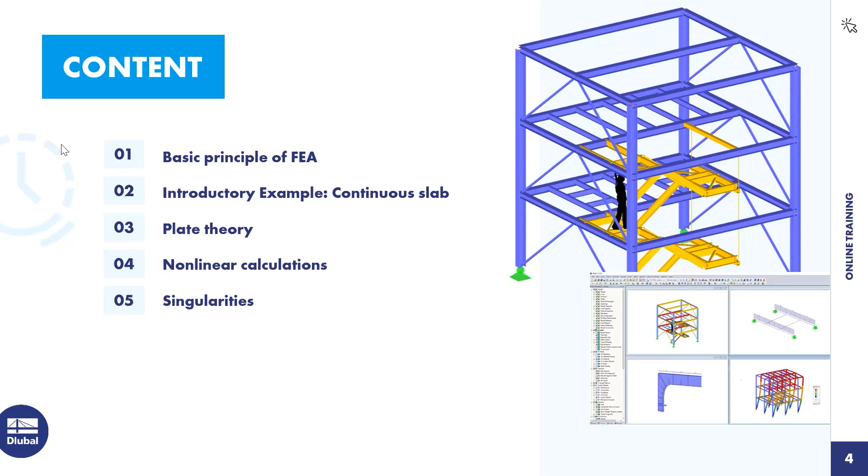Okay, so let's start with our basics of the finite element analysis. As you may know from previous static lessons in your studies, there are two methods to calculate overdetermined systems: one would be the displacement method, and the other would be the force method. The force method is called that since the forces are the unknowns in this solving process. Within the displacement method, we have the displacements as the unknowns. The displacement method is, in this case, more important for us since it is implemented within RFEM. So also most computer programs will use the displacement method.

In general, the finite element analysis is used when an analytical solution of the structure is hardly possible. That means we can't just create a function for, let's say, an 8-story building which gives us the exact solution for every force we have there. Instead, we will take the help of the finite elements.

And that's what we do with the finite element analysis. We're gonna take the real structure and we're gonna cut it down, or decompose it, into a mesh of finite interconnected elements. So there's just a specified amount of elements in the system, and they are connected to each other. We will see it in the next slide as well—there are some graphics for better understanding. Then what we also will need is to define the properties of the element continuum.

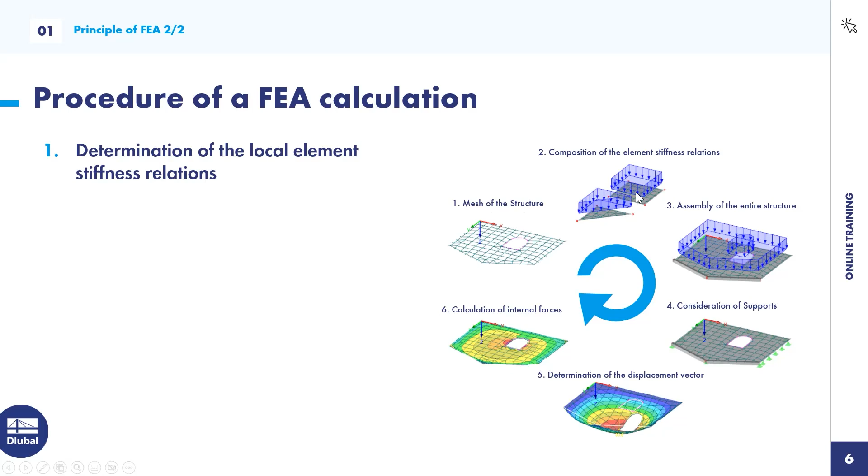For these finite elements we can define the stiffness matrix, the element stiffness matrix, as well as the element load vector. So if we only inspect one finite element, the system is already known. In the next step, we will combine all of those elements, and therefore combine the element stiffness matrices and the element load vectors into the global stiffness matrix as well as the global load vector.

Now for the understanding, there's this static equation called K times U is F, which means the stiffness matrix times the deformation vector is the force vector. Due to assembling them into the global matrix and vector, we have this K as well as this F. But what's not known is the U, the displacement vector - that's what we want to get to.

So let's go. Now we have the total stiffness matrix K. In the next step we will use our support conditions, which we can see there, and use it within the displacement vector. For example, for this edge of the slab we have a line support, and this line support is fixed in the Z direction, which means the line can't move in Z direction.

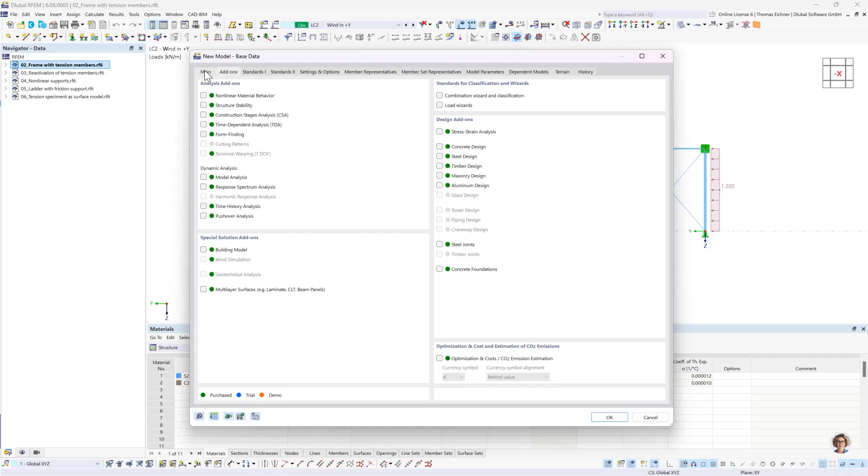Okay, and that's it, so we can press OK and find our empty model in the next step. There it is. So let's go with the view into the Z direction. We can go with our view cube or with those buttons here on top. That's pretty great, and there we are.

So since we're gonna model together, or let's say to start from scratch, I will also delete all of my previous elements here. That means you just delete all basic objects, so there's no material defined anymore, no section, and no thickness.

Now let's go with creating our first surface. Therefore, we could go here and just double click like the surfaces, or right click and create new surface. What's also possible, and I mainly use this button since it's just the fast bar here on top, I will click on this button and then we can choose the rectangle. And if we used it the last time we created a surface, we will just click it and have the dialog opened.

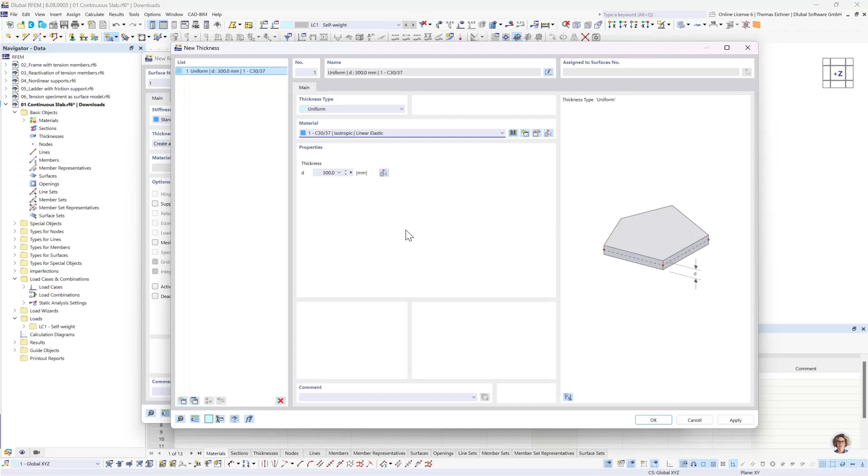So we're gonna take this one, press OK, and there it is. With another press on OK, we will have our material assigned, and then with another press on OK, we will have our thickness as well as our material assigned to this surface creation. And that's what we're gonna do next. We're gonna press OK to get back to our graphic interface.

There we are. And then we will create a 10 times 5 meter surface. Yeah, why not like this? And there it is. So we have our slab right here.

We can also look at it in 3D. We can use our display model settings for showing them, let's say, transparent or filled. This view is always good for bigger structures when there are more surfaces under each other or they're overlapping kind of and stuff, so we can pick them better with this dotted or lined line here. Per double click on it, we can adjust it, but that's not needed right now. Also, we can see our base elements, so our material, our thickness, as well as our surface right here in the data navigator.

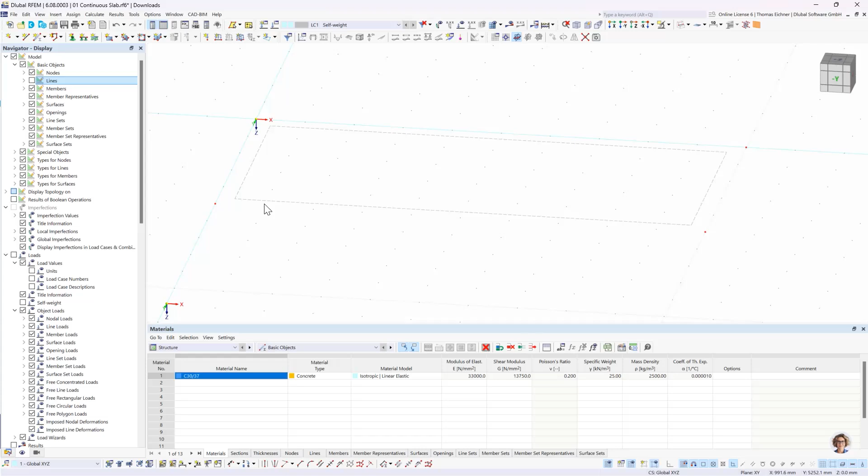Okay, let's go for one additional display option here. You can define different renderings or different views in our display navigator. We could say, okay, don't show us any lines. If we deactivate these lines, these corner lines will disappear. With this, you have your own possibilities on what you want to see and what not.

In addition, there's also this button here where we can influence our rendering. If we go on our rendering on this model, we see the solid model options, and further in the surfaces, we could also show them with thickness. That's if you want to have more like an architectural view, and you could activate this.

However, since it's a static program and we will use it for statics, this kind of 3D element—because like a real plate has a height as well—in our finite element analysis, we will treat this as a 2D element. So it will have just 2 dimensions.

Okay, let's leave this here, that's not needed anymore. So what we did now is we just created one plate. And this plate would just fall down right now.

So what we need next would be our boundary conditions. For those boundary conditions, we will also need a line in the middle of the surface. So that's what we're going to do. We're going to take this create line function, and go in the middle on the top as well as in the middle of the bottom. And there it is, our lines are set.

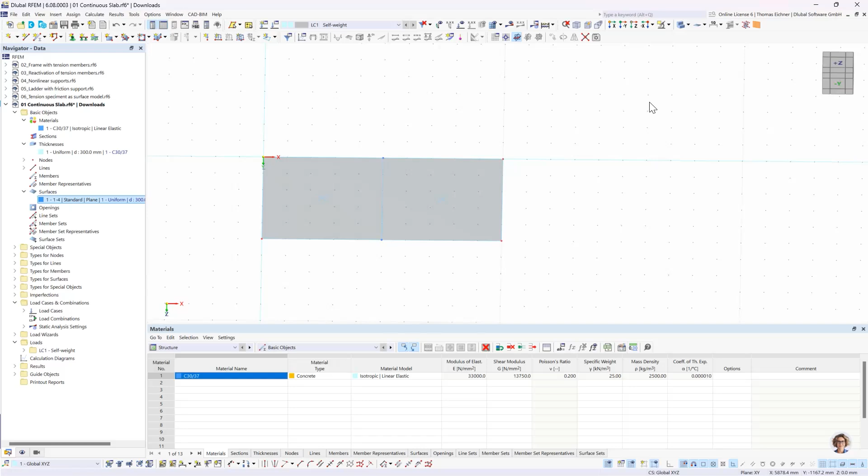We can also show it in our other display mode so we can see the line better.

And now we want to apply our support conditions to those lines. That's completely simple. We're just going to take our quick button here on top, or we could also go for our types of lines for line support and then assign them. However, since this is the most used tool here on top and it's quite fast, we're going to go for this procedure. Let's take it and look at this suggested hinged line hinge.

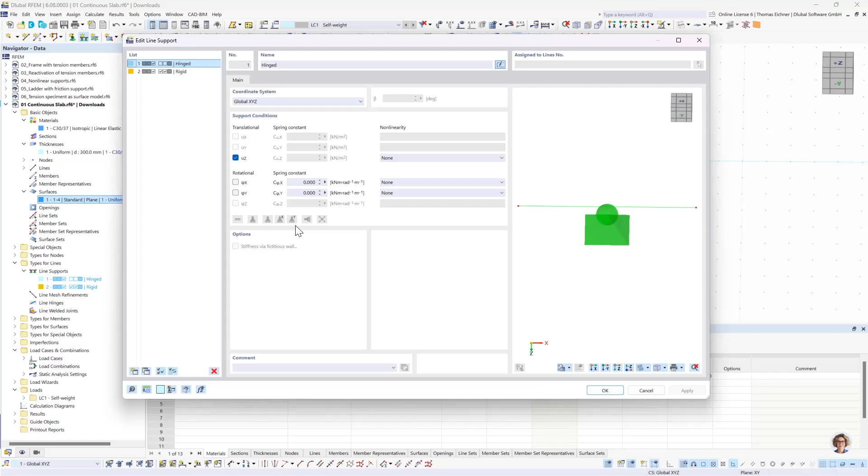Now we will see the benefit of our early decision to model it in the plate dimension and not in the 3D domain. The program now helps us since we are in 2D plate: we don't need the deformations in the horizontal directions anymore, and we don't need the rotation about the z-axis, which also would be kind of deformation in horizontal direction. So with this, we only really want to hold like the z direction on these lines, and that's already set within this preset hinge. Let's go for it.

Here again, and then we will apply those supports to our lines. There they are. We can also apply the loading next, which will be just a uniform load, uniform surface load of 10 kilonewton per square meter. With that done, we can just assign it to our surface here. Okay, and there it is.

So our loading is done, our supports are done, our system is already ready for calculation. Just another hint: we can also adjust the size of supports as well as of the loading if we want to have it changed.

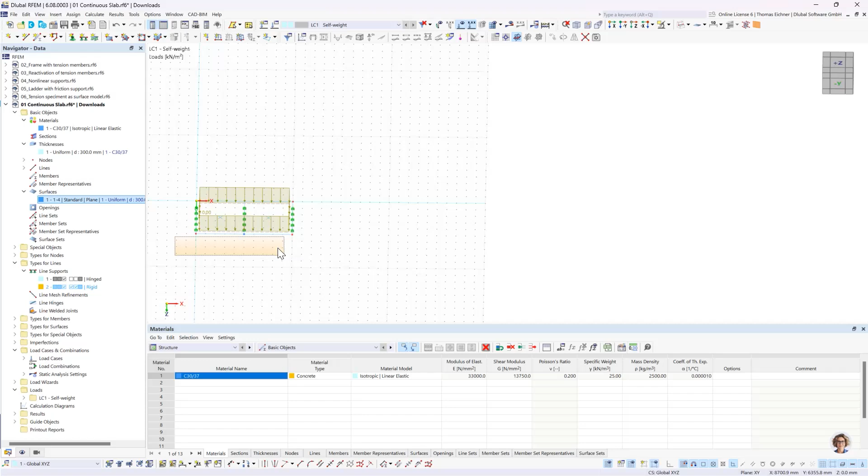Then maybe let's just create our further plates for the investigation. Maybe you saw it already on the PowerPoint file—we will need 4 plates to investigate, which means we will go again and select everything within our current system. We will then right-click it and take the benefit of our move and copy function.

Let's click here and let's also check this create copy button, which is really important. The next step, we're going to copy it 3 times. We have a length of 10 meters, then I want to have a space of 5 meters, and then there should be the next system.

So we will need 15 meters. Now I just see from a previous model I had open, I'm still stuck with millimeters here as the dimension. I want to work with meters in the current model, so we can go for this units button on the bottom. We click on it, and this red arrow will help us see what units are used in the current dialog. We see we have lengths in millimeters, and we're going to just change it to meters.

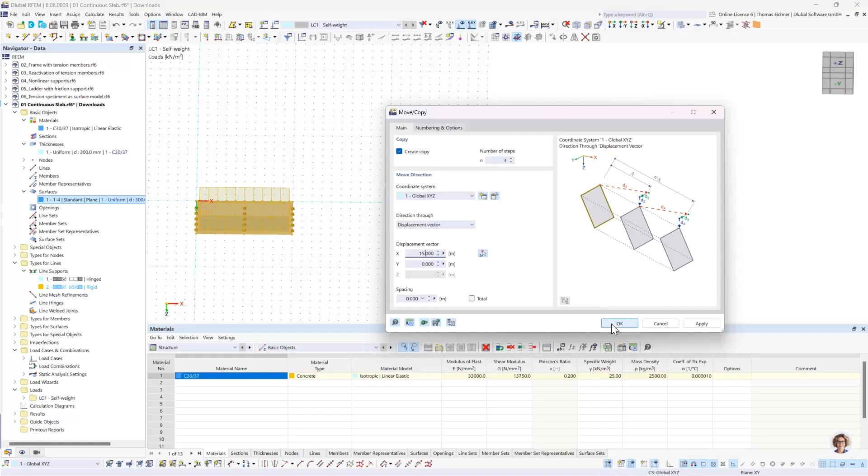Let's prove it here and set our displacement for the X direction to 15 meters. When it's done, we can confirm it, and there are our new models.

Now we see that our grid is not over the whole system anymore, so we want to adjust our grid here. That can be done with a right click anywhere on the screen, then clicking on the work plane and grid options.

Within here, we can see we currently have 30 dots from here, and that's not enough. What we want is a lot more points, so let's pick 200. Later on I'll show you how to set the number of grid points dynamically.

We also want a different spacing between those dots. Currently they're set to 1 meter, but the problem is we won't have dots in the middle of the plate. Since it is 5 meters, the middle would be at 2.5 meters. So I will adjust it and make our grid a bit more fine. Let's set it to 0.5 meter and apply it.

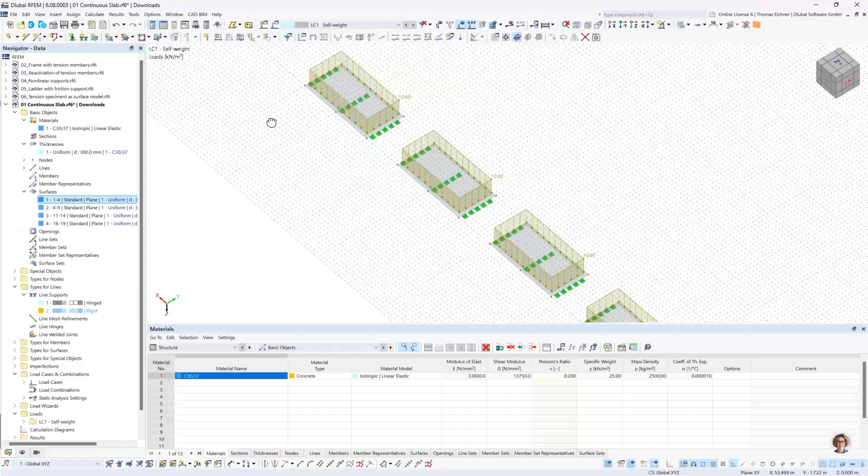We can also look at our plates in 3D for a second. Let's go like this - looks okay for this short duration of time. We just created 4 cool systems.

At least simple systems. Okay, so in the next step, we will go for the Z view again, and as I previously mentioned, we want to investigate the size of those finite elements. Another hint: if you double click your middle mouse button from anywhere here, you'll get back to the system, and the screen adjusts to fit all of your system within the window.

Since we want to investigate the size of the finite element mesh, we'll also want those slabs to have different finite elements. But first, what is used if we don't define it for each surface? Without any assignment, we will have just our base settings here.

This means we can look at them with the calculate button on top, and here we can find our mesh options and everything regarding the mesh. If we go for mesh settings right now, we'll see that currently we have a length of the finite elements of 0.5 meters, which means for these edges of the finite elements, the program tries to reach 0.5 meters with them. If it's not possible, it will vary it and could also add triangular elements.

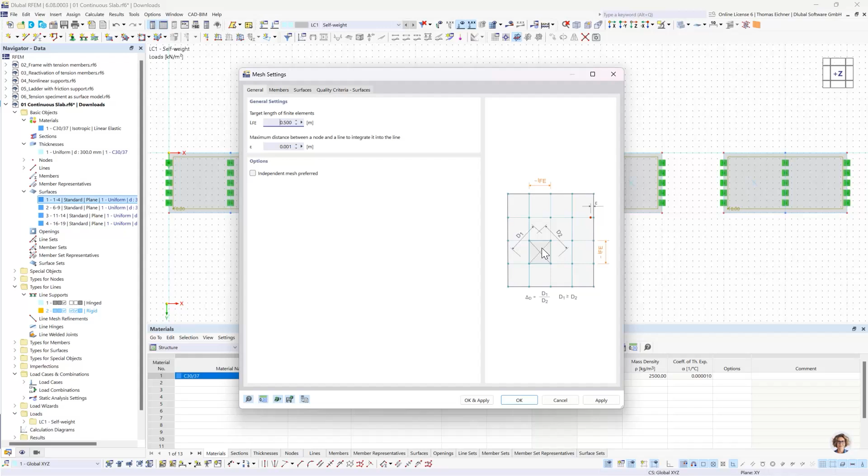However, we won't use these global settings at all, since we're going to apply surface refinement adjustments for every surface here. And since we're talking about surfaces, here's another hint: whenever you're modeling something, and this something can be assigned to a basic object, then it is kind of a property of this basic object.

That's where our types come into play. Right here we have our types for nodes, for example nodal supports. We have our types for surfaces, like surface supports. And here in types for surfaces, we can also find our surface mesh refinements, which we'll open with a simple double click.

Right here, we can now just create our surface refinements. The first one will be quite coarse - we'll go for 2 meters and assign it to our first surface here. We'll apply it and create our next mesh refinement.

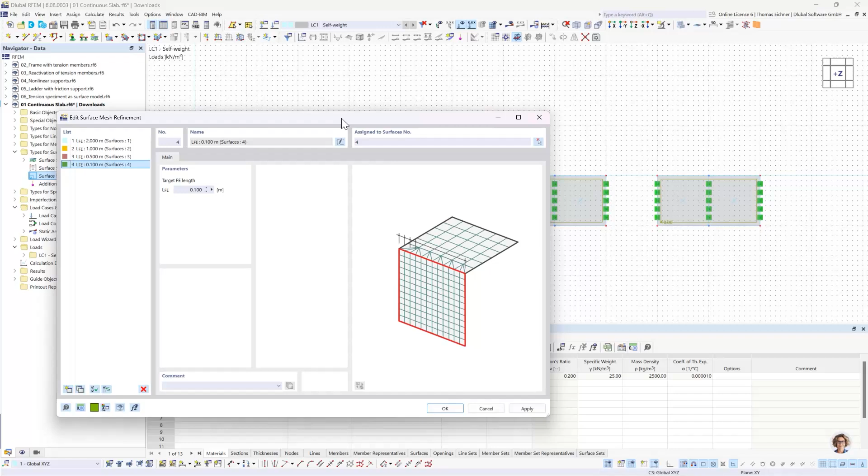If you press cancel, everything we did within this dialog is not saved, so we will press OK. And before I press OK, I just want to have this here so you'll see what happens. Let's press OK, and there it is.

We now have a new rectangle within our surface, and we can see this for every surface. This shows us what the desired size of these finite elements will be. Here our quite coarse one is 2 meters in length, and here we'd have to zoom in to even see how big this element is, so that's really fine.

Okay, so now we have the system created. Now we can go on and create a little helper for our interpretation of the results. Since surface results are not the best to interpret within the surface overall, we could also create a section through all of those continuous slabs, and then we can evaluate the results just within this section. That's what we're going to do.

Now, the section is not a property of any basic object. It's not only that the section can cut a solid, it could also cut a surface, so it's not a property of a surface, for example. For that case, we have something called special objects.

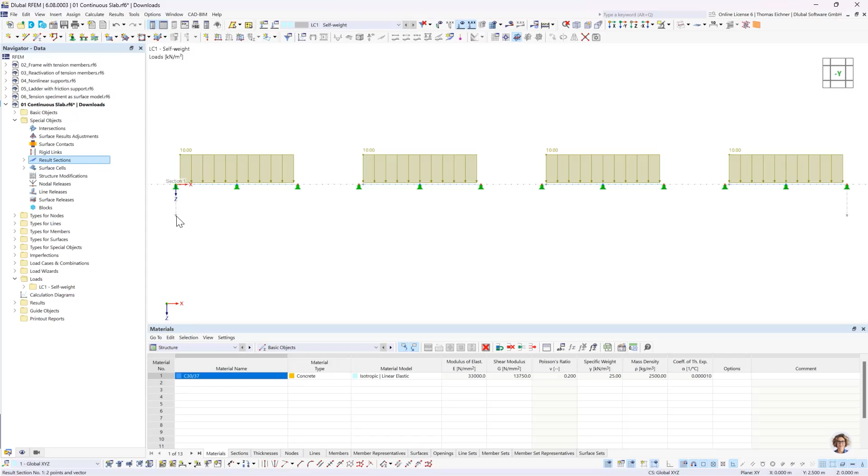Let's press OK, and let's turn the model for a second, and here we see it. Oh, maybe it's better to just use this -Y view, and there we see the section right here. Okay.

So our surfaces are ready to go. Let's maybe show our FE mesh of those surfaces again. And for the comparison, we said we also want to look into the results of a just simply supported beam. That's what we're going to do next.

We're going to create here this new member, and within this member, we will have to apply a section since we don't have any. It's like the same procedure as with the thickness before. Let's go for it. Gladly, our right material is already selected here.

And we will have to adjust just the section dimensions. So what do we take here? For the height, it's quite obvious - we will take the same height as for the slabs. But now let's look at the other dimension of this section.

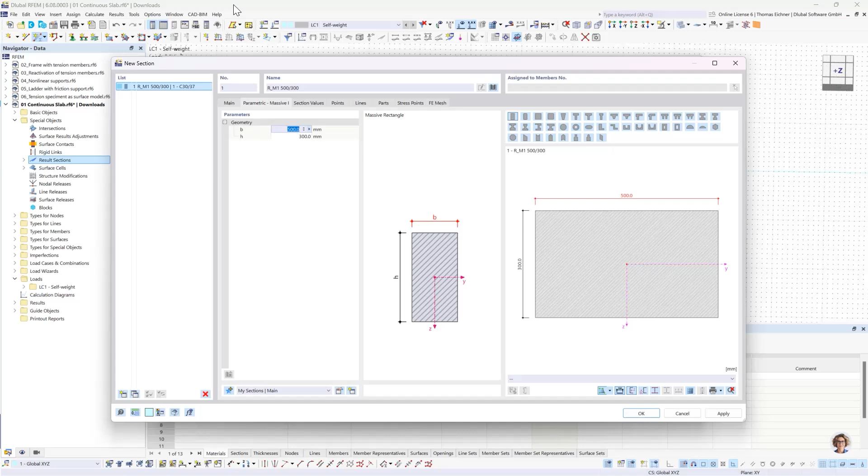We have 5 meters in the width of the plate. However, we now don't need a 5 meter section here. What we do need is a 1 meter, so 1000 millimeter section right here.

And the reason for this is the results of surfaces are displayed per meter, and the results of members and beams are just shown in pure kilonewton - not kilonewton per meter, just kilonewton. So if we would have 2 meters here, it would still be just kilonewton. So to have this per meter within the results of this member, we will just pick a 1 meter section here. Press OK here and also press OK here.

This will get us back to the graphic user interface, and we will be able to create our 10 meter long member. This is done now. Now I see I have here some member representatives.

They wouldn't be needed. Let's see if we can just deactivate them. I mean, it doesn't change anything, it's just some help, but I don't want to have this dot right here.

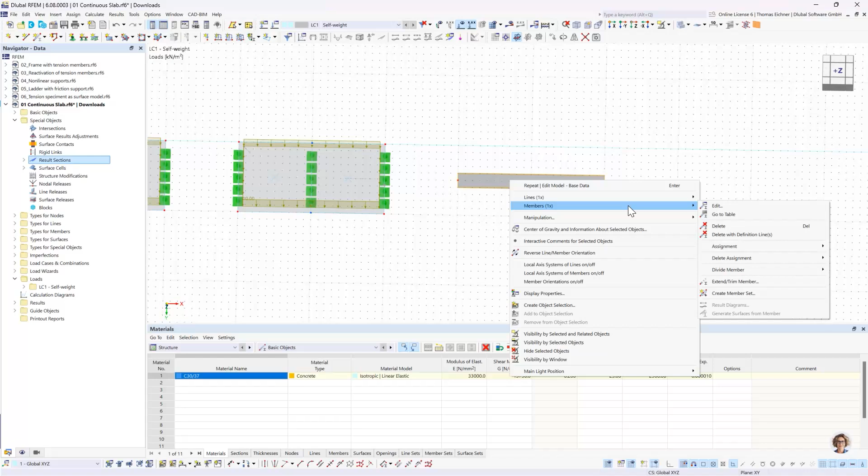Okay, now we want to have supports again, but we are missing this one node in the middle. So what we're going to do is right click on the member, go for this member, and divide it with n intermediate nodes.

There, just one is enough, and we can create the division. If we would now press OK, then this member would be 2 members which are still connected here in the middle, but we can also use our member nodes, so this member won't be divided.

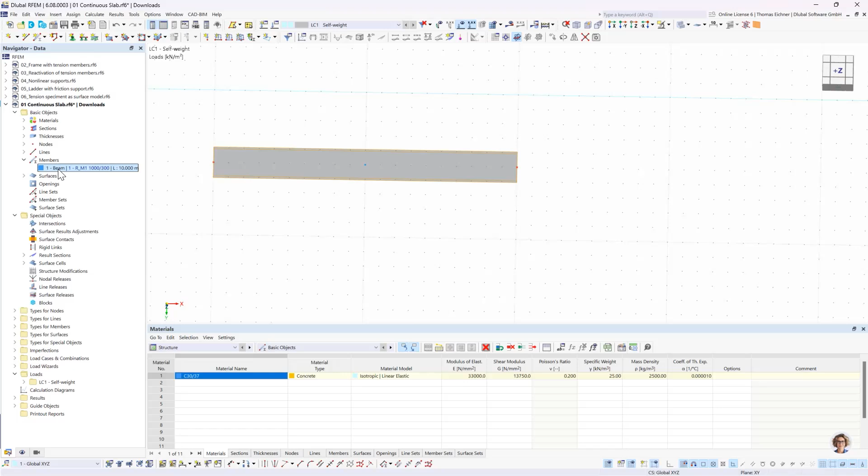Maybe as a hint, it wouldn't make any difference for the results. The only difference now is that we still have 1 member. We still have, if we go for the basic objects, here still only 1 member. And you can have fewer objects within your model with this.

So if we hover over this node, we can see that it's defined with 50% of this member length, which also means if we now change this member in the length, also the place of this middle node will change. So we don't need it.

So let's go back to this 10 meter beam and now apply our support conditions. For this plate, we did only fix the Z direction. Now for the member, if we think about it, if we only fixed the Z direction of this member, that seems okay in the first step. But the problem is it could rotate around its own axis. This is not possible with this line hinge for the surface, since let's say it's supported here and here, so no rotation is possible.

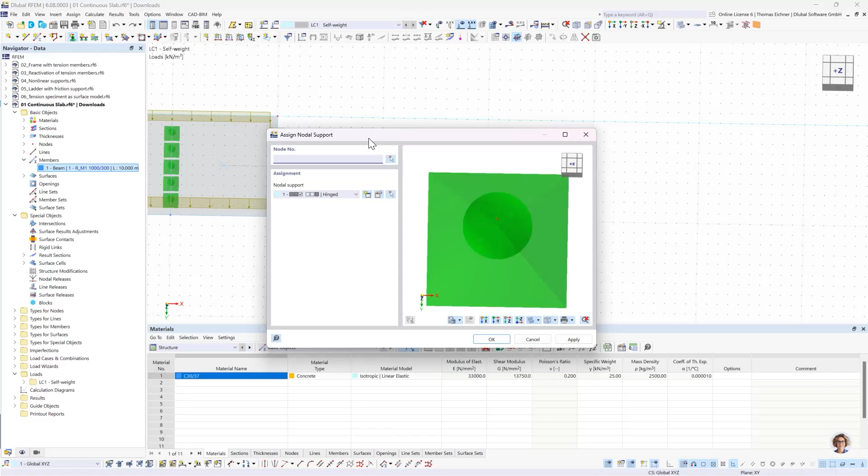But with this point nodal support, we don't have this interaction kind of. So we need to also restrain this rotational degree of freedom. So we will go for this nodal support, and we will look at our predefined hinged one, and there it is. And now there's the point I just said: we will also have to restrain the rotational degree of freedom here.

Now, we would only need to restrain the rotational degree of freedom on one end or on one node, and we wouldn't need it on the other two, but for simplicity I will just apply it to all three nodes, since for the results again it doesn't really matter in this case.

Okay, so there's one more thing, and that's that we need to load the member in the same way as we loaded the surfaces. That means we will take our member load here on top, we will take it and just apply 10 kilonewton per meter to our member. When it's done, we have it right here.

Okay, now our system is completed, but I just remembered I also want to have something different in the material. So now we want to change the material. There are different ways to go to. We could go per double click into our surface and go for the material and so on. That would need a few more clicks.

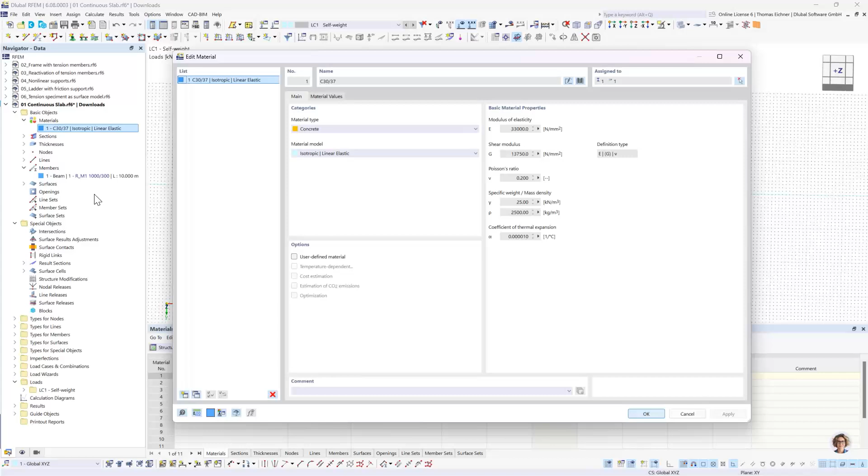The simpler way would go like this. We will take the material here, double click it, and we are in all the properties of the material. And now what I want to change is this Poisson's ratio.

So that's kind of a value that describes the influence that, let's say we have an internal force that makes pressure in this direction. This Poisson's ratio would give you information about how this internal action in this direction would influence the perpendicular direction.

And since we are comparing everything here with each other, we don't really want to have this impact here. So we want to set this to 0. And that's only possible if we first activate this small user-defined material button. With this active, we can just change it to 0, and then we are good to go.

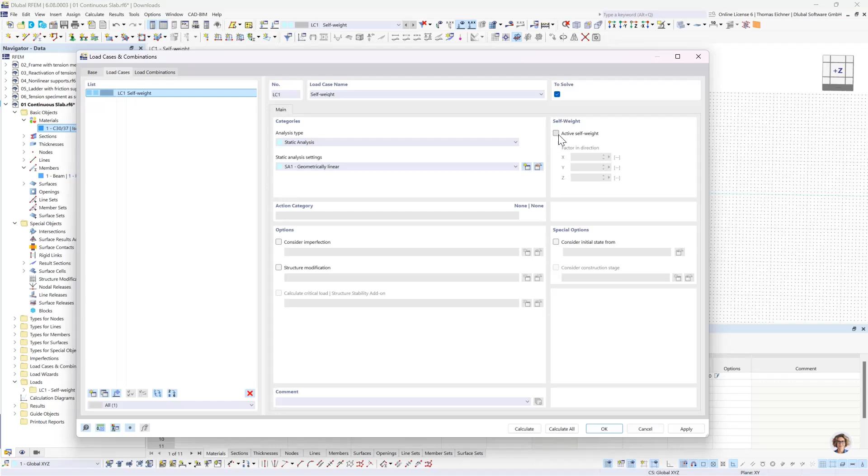Let's see at our self-weight load case here on top. Within this, we only have this one. We have our 10 kilonewton per square meter load in it. But here's also, that's just predefined by the program - it always creates a first load case with only the self-weight active. For this special case, we don't need it. It's simpler to just have a 10 kilonewton per square meter load for interpretation. So we will just deselect this option.

Okay, and yeah, right now we're done. So maybe to repeat a bit of theory from earlier: we have our plate, which defines our stiffness matrix. We have our loading, which defines our load vector. We have our supports, which have influence on our deformation vector. And with that, we have our equation, K times U is equal to F, ready for its solving process.

And that's what we're gonna do now. We're gonna go here and calculate this equation. Let's see what's gonna happen.

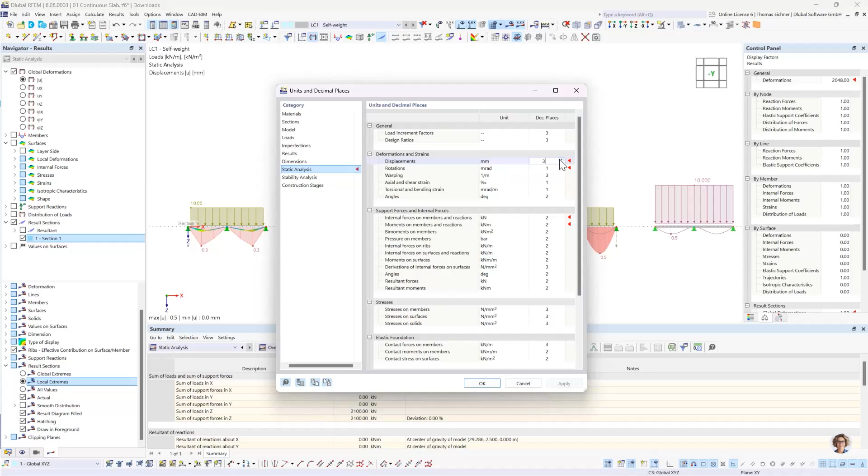Maybe let's make it more clear. One digit is not enough, so we want to adjust the digits here. That's done again with our units and decimal places, right here. Again, our red arrows show us what is currently shown. And here we will go for 3 decimal places.

There we go. And right now, the first thing we will see is the very fine finite element mesh. Well, it's almost the same as our beam element, so that's quite an exact solution.

But now the next thing is, let's look first at the deformations and then at the internal forces. We will look first at the deformations now. We have here that kind of fits. This here, well, the difference is quite low, so I would say that's also precise enough.

Here it gets to something like 10% already. And if I see a 10% difference, in reality that could, maybe that's not enough accuracy for design, but it's also not too bad.

But the problem comes now with this one. And that's quite a bit, that's like more than a fourth in difference. And that's not acceptable. This could lead to a complete collapse of the structure. I mean, this as well, but this is quite fatal.

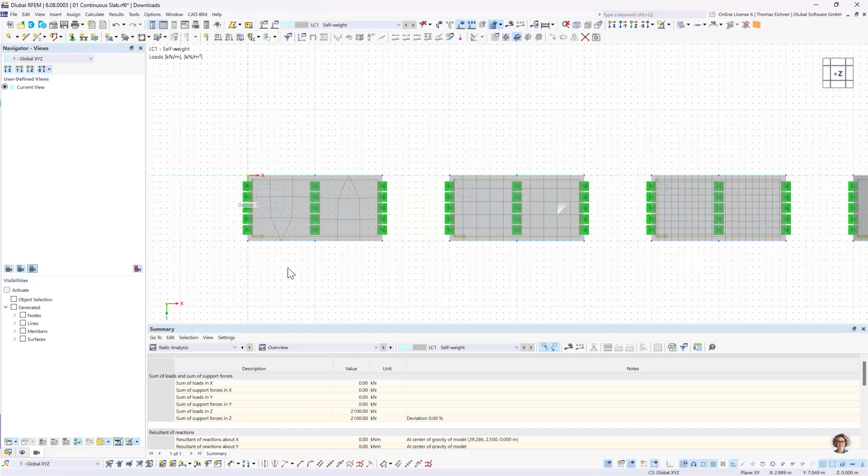So right here we have 3 elements. Now when we look at it, we could also imagine a single span beam here. Then we know our maximum moment would be in the middle. But with this element in the middle, we wouldn't have any result in the middle. That means we wouldn't even have the possibility to show us the maximum here, because the next value which would be shown would be this here at the edge of this element. So that's just not good.

And that's the point here in the next figure. We can see 5 elements here. I learned some rules in my studies, and the rules were like 6 elements between supports for a single span beam should be good. You should use 6 elements between 2 supports, or also if you have a line load or a support load, you should also have 6 elements between this line load and the next support or line load.

Like everything, there's a change in the boundary conditions or the force, there should be around about 6 elements to the next change. For design, if you're just interested in looking at the forces that will get to your supports, then it could also be that just 4 elements are enough. But if you want to remember something for the future, I would go for 6 elements.

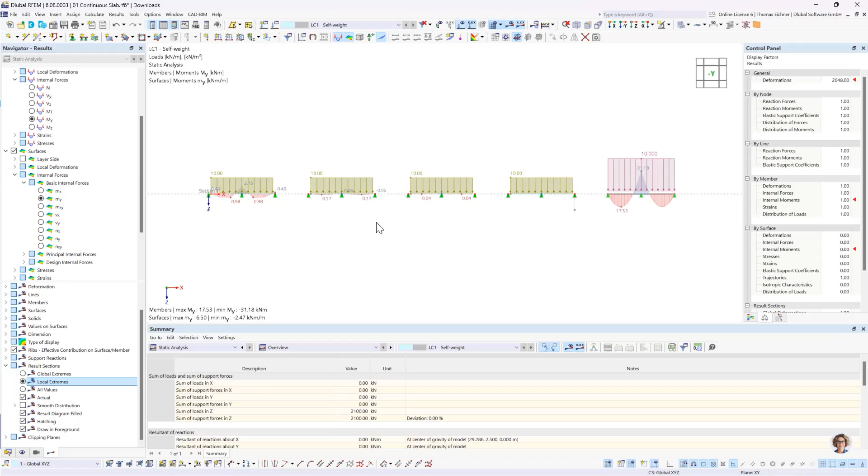Now for the explanation, we have different internal forces conventions here. So for the My, it's quite simple. Our y-axis points outwards. This means with the right hand rule, we will know our positive My would be like this, pointing upwards. It's rotating around the y-axis. That's why it's called MY for beams.

But now it's different for the surfaces. Before I explain it, we will change to the right one. We will go for this MX. Now we see, okay, now we have comparable results. But why is that?

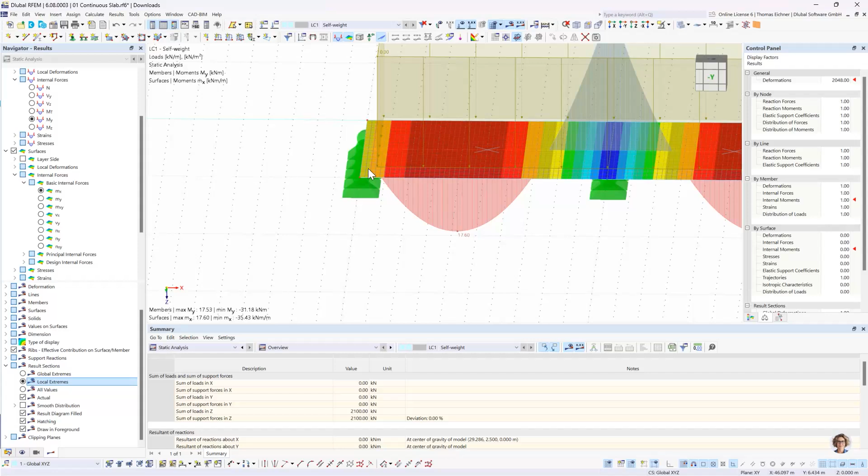Now for surfaces, this is differently defined. So it's called MX since we have the surface, we will go in X direction. And there's a plane that's cutting through the surface now, and it's cutting in X direction, so perpendicular to the X direction. And then we rotate about this edge here, this free cut edge. And that's why, since the cut was done in the X direction, it's called MX. That means the MY would be exactly in the other direction.

Okay, so let's go again for the Y perspective. We can also see here the results are quite similar. And let's not show the forces anymore. 31.18, 31.19, that's almost the same, but there will be some differences.

And this time we will go for this section here. Now we select the section with a right click, and then this result diagrams. We will jump right here. There it is.

And here we can just see the results for the different. It's just the same as we saw in the model, just that they will be next to each other, and they could be better prepared for a printout report, for example.

Okay, don't need this preset. We're only gonna look at our results right here. And there we have it: 31 point something versus 28.45. It's some difference. That's, in this case, I guess 10%.

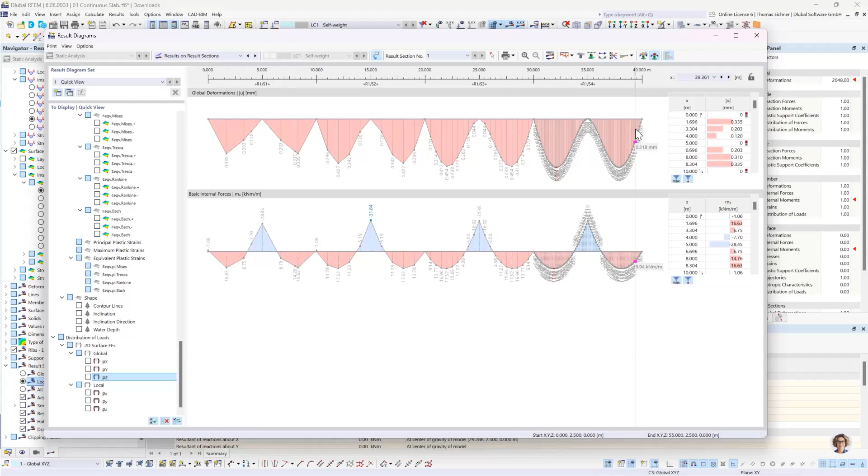And this 10% also holds for the middle of the span here. And this 10%, those are not enough. I would say this result is just not precise enough. So here, maybe we can look at that a bit better. So here this 28.45 versus the 31.18, yeah, almost 10%.

That's not quite good. So that's the problem with this coarse mesh. We will lose exactness in the results. On the other hand, let's look at this extremely fine mesh, and let's also show again all values. Within the left system, we will see we only have 1, 2, 3, 4, 5, 6 elements here. So our global stiffness matrix is constructed out of the element matrices of 6 elements.

We're just ignoring this dimension right now. Let's say we only investigate this direction here. So 6 elements, so this can be, excuse me, this can be quite fast solved. It could also be almost calculated by hand, not fast, but it could be.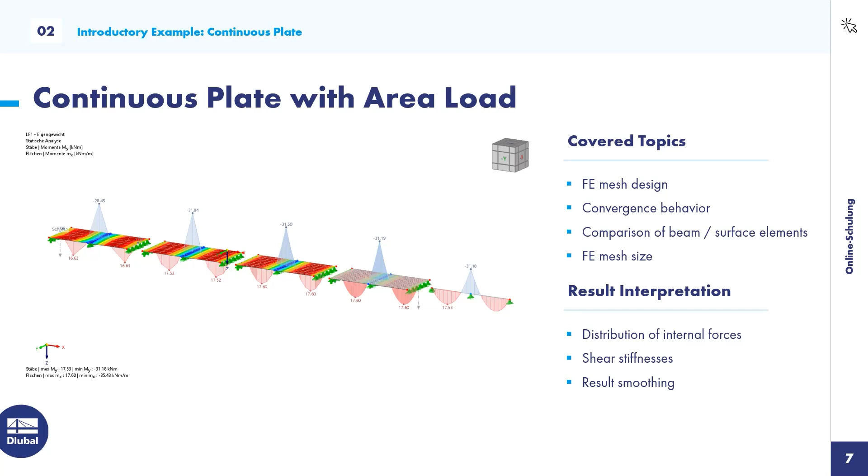Okay, so I would say we're already done with this part right here. And now we can go on for our next short theory. Back for our PowerPoint. There it is.

And the next part will be the plate theory. So for members, you might know there are two concepts or two theories. The plate theories are almost the same as those for members. So for the beam element, we have the Bernoulli as well as the Timoshenko beam. The differences, well, let's go for the similarities first.

The cross sections remain plane, and that's it. Now the differences: the cross sections for the Bernoulli beam remain perpendicular to the member axis, while for the Timoshenko beam, they won't stay perpendicular. You will see it in a few seconds in the next slide what that means.

For the Bernoulli beam, we just don't care about the shear stiffness. We just don't care about the shear deformations, and it's just rigidly for shear forces. So for the Timoshenko beam, on the other hand, we will have an influence of the shear deformations. That means we won't only have this bending deformation, but we will also have an amount of shear deformation that's just added.

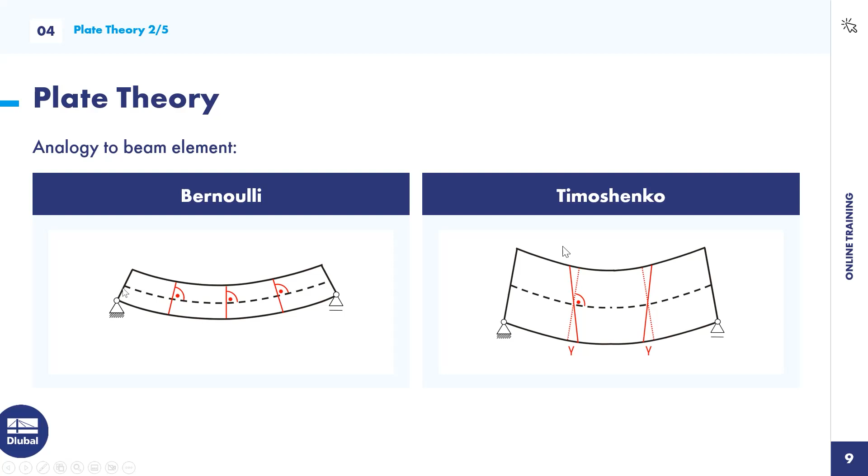Okay, let's adapt this to our plate theories. And there's just different naming and a bit more, but mainly it's different naming. We have the Kirchhoff plate theory, and we have the Reissner-Mindlin plate theory.

The Kirchhoff plate theory is, well, more equal to the Bernoulli beam. It has geometrically linear and small deformations. We have a linear elastic material law, the Hooke law. The cross sections remain flat and we don't have any warping inside these slabs. We have a constant thickness and we have this no consideration of shear deformations, like for the Bernoulli beam.

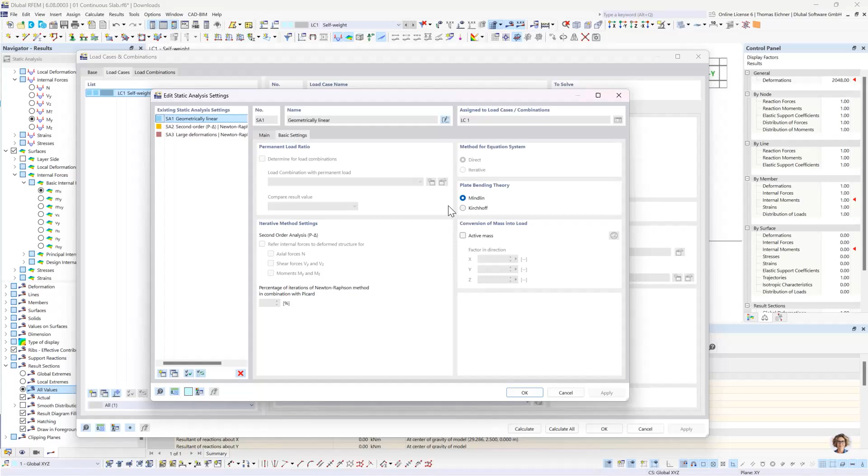Like mostly you can also, for such findings of settings, I mean this is quite a big program, and it has, at least for students, let's say, limitless possibilities. If you think the program can't consider your investigation, it's most likely that you just need to find the place where it is in the program.

For that, it really helps to use our handbook, or let's say, for example, this Reissner-Mindlin and stuff. You also have this short helper here with our Mia, our AI assistant. It's also on the homepage, and you can just write your question to her and she will send you an FAQ or the direct link to the place in the handbook, and then you just get a GUI screenshot where you can find it. So that's, I know time is rare, so this will help you be faster.

Okay, then let's go back to the PowerPoint, but I think we're done there already. Exactly, so we're done here already, and that means we can jump back into RFEM. And for the next few models, you won't have to model along. I prepared some models already, so this is something you can just watch right now.

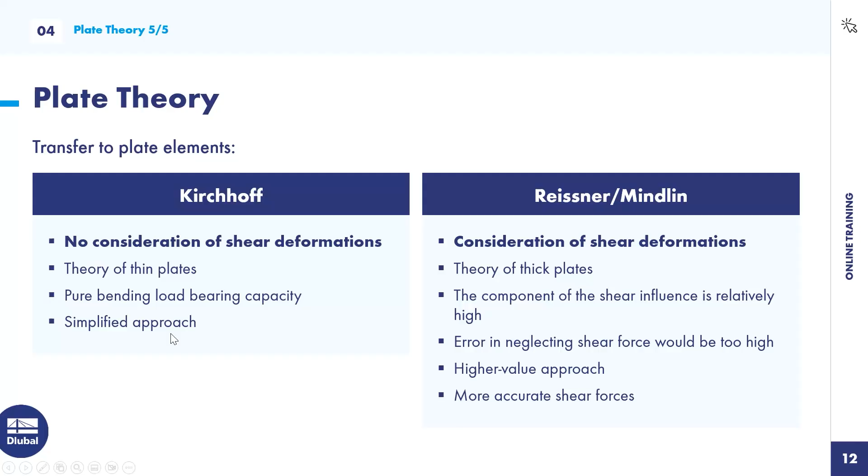And yeah, exactly. So we have right here a frame with tension members. What does it mean? That means we have nonlinearities. Just for one thing here, since we're treating nonlinearities, let's also define what a nonlinear calculation changes within RFEM.

The biggest problem within those nonlinearities is that we can't use the superposition law anymore. Means if you remember, like the first semester, you would just calculate the first load case, let's say self-weight. You will get your moments, you will get your shear forces as results, and then you will pick your next load case and calculate it independently. You will get your results, your internal forces, and for achieving the final result you will just add them, because why not?

And that's right for linear systems. The problem is now with nonlinear systems, this is not possible anymore, because the loading from the first load case can influence the system in a way that it changes its behavior for the other loading.

And that's something that can happen with different applications. One would be the geometrical nonlinearity. That means if we have a geometrically linear system, we will apply a loading to a structure, and the internal forces will be calculated for the undeformed system. So we only need to solve the equation system one time.

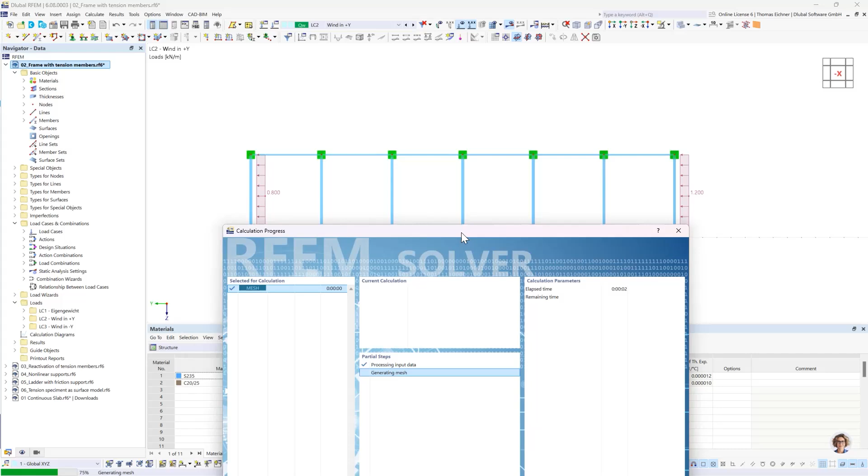Okay, there's some error. Something seems wrong. Here the stiffness matrix is singular. That means, mathematically, the structure is unstable - it would collapse. It also gives us a hinge at this node in the Y direction. Y is here, so it would just fall down in this direction. All these members would rotate around their supports, and this would just go boom.

Well, that's a problem. So we want to do something against it. And that's something we're going to do with those cables here. Let's look at them. What do we have here? On the left side, we have trusses with a nonlinearity. So in this case, we have a member nonlinearity.

Failure of compression, already defined. Go into this member nonlinearity, failure of compression. There we have the definition of how the member would react to any forcing. If we get into tension, a positive normal force, then we would have some stiffness in the member. However, as soon as we go into compression, the member completely fails - it won't take any load anymore.

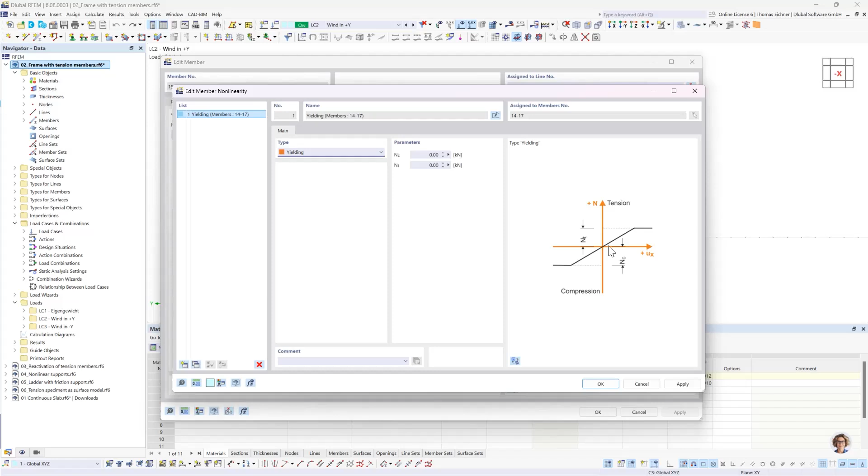There are also different possibilities. Let's check, for example, the yielding. This would mean it would go to this yielding limit, and then it wouldn't take any more force, but it would still be able to hold the current force level. Okay, failure compression, that's okay.

One alternative for the truss with this nonlinearity would be to just select this tension member. It's just the same - so we have multiple ways to the right solution here. Let's stay with our truss. Let's press OK and see what the system does with our adjustment.

Okay, and there we see something. Well, it's not unstable anymore. That's great. We see this horizontal force mainly travels directly into the support. We could also look at the support forces - it mainly goes directly into the support with this member. I would say 3.6 will go directly into the support with this member. The other 3.6 will travel through the beam here on top. And then we have this tension member, which will redirect most of the force back to the support.

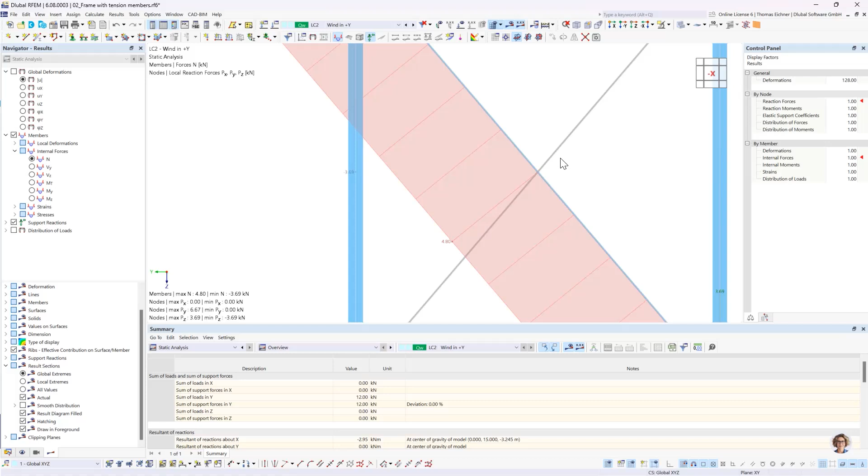And what's with the other member here? Well, if we think about it, and if we look at our deformations as well, let's do it like this. Then we see this member, compared to its original placement, shortens. And if it shortens, that means it would have a pressure force. But we told the member it's not able to take pressure forces - that means it fails. And if you look closely, you will also see that the color changed. We have the blue tension here, and this one is gray now. If a member is displayed gray in the results, that means it failed.

The same on the other side, just with a bit different values. It's the same here - this one takes the tension, and this member will fail. Okay, and that's it for this model.

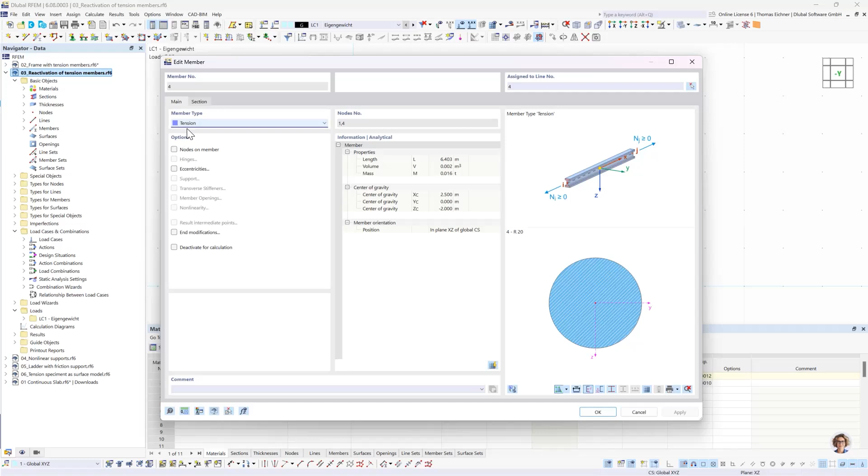And in the middle, just as we did in our example before our break, we have a tension member type. So it can only carry tension forces and it will fail under pressure forces.

So the loading is quite simple. We just have a vertical loading of 100 kilonewtons on both of these points. Let's look at our load case right here. We have a geometrically linear analysis setting here, so that's getting us to the next point of nonlinearity, and that's geometric nonlinearity, which we will investigate right here.

Let's just calculate the model with this first order theory. And let's see, it's working. Now we see what happens here. We have the system, it's just going to deform in vertical direction. That means these tension cables would shorten.

That means they would need to take pressure, and that means they are gray now since they both failed. Now what we want to do is a second order theory analysis.

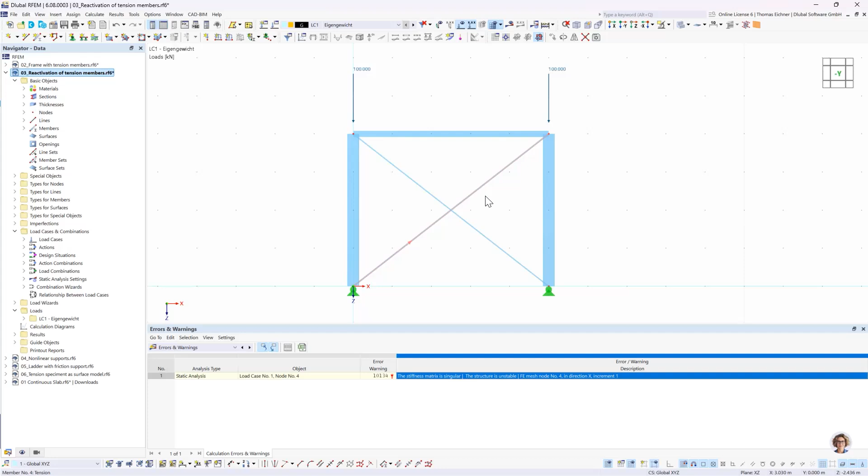So in reality, what would happen? We would have the force, the system would go downwards, both members fail, that's okay. But the thing is, when the system deforms to the right side, there will be a point where this member would be under tension again. Since the system deforms in this direction, the member kind of gets longer, and at some point this member is at its original length again, and from that point on it will take tension forces again.

But this is currently not considered. That's no problem though, because we can just go into our static analysis settings right here, and we can go for this reactivation tab. And that's what we're going to do. We're going to add this exceptional handling. That's perfect for those cases.

That means we will only remove, we will only have one failing member each iteration. So with this active, and with a new calculation, we will now have a stable system again.

Here we can see, and that's exactly what I mentioned before. Now the system deformed a bit, also in horizontal direction, because of the second order theory. And this member now takes tension forces. They are incredibly low right now, since the second order effects are comparably low due to the only vertical loading, but this setting helps to reactivate this member again.

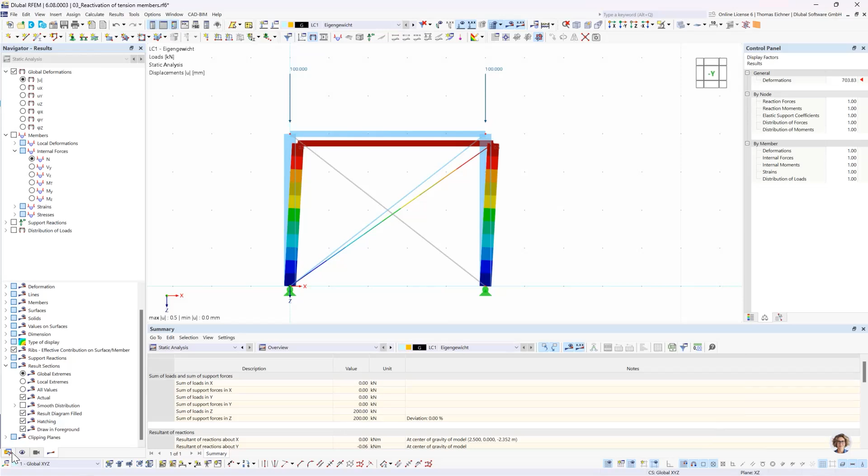Let's jump into nonlinear supports. So right here we have, let's call it a cantilever. Without the support it would be... we have a cantilever, and it's forced with a single point load of 15 kilonewtons here on top. And we have a support that holds it right here.

So for the comparison model, we added a nonlinearity to this support. Let's look at that nonlinearity.

Here it is, and we can see in the x direction, we have a failing support now if the reaction is negative. Let's see here, just maybe one more hint: our support reactions are always shown as external forces. We would have a force that comes to that support, and the support reaction is in the opposite direction.

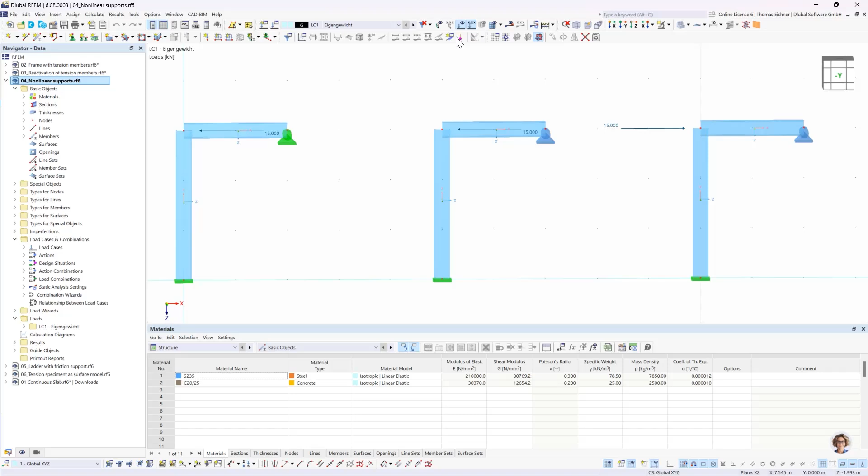Just as a hint, now let's look at the results. And here it is. So we can see for the first system, where we have this 15 kilonewton here, most of the force is directly taken by this support. Let's maybe just go for another visualization. We can adjust our deformations right here and go for only lines. This way we can see this 14.88 support reaction.

The support reaction looks in the positive x direction, but just as I mentioned, this is visualized as external force, and the force that really comes to that support would point in negative x direction, like the force we applied here. You see this 15 kilonewton? It's directed in negative x direction. So there will be a force to that support in negative x direction, and for that support to be able to withstand, or to have zero deformation, it needs to have a reaction force in the other direction. That's why this reaction force is defined as positive. But that's important now for our next system.

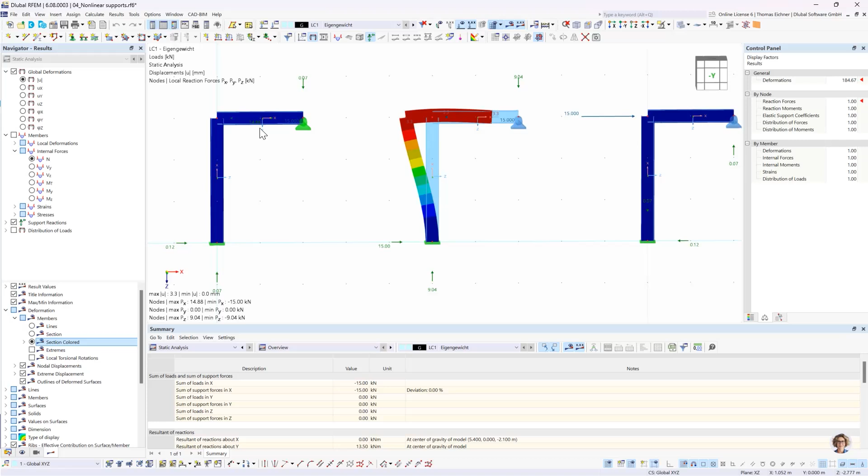Let's go for the sections again. And this time, this support will fail. We defined the failing as if the support gets a negative x force. And that's what I meant, because now this could be interpreted as this 14 support force from the left system being a positive support force, and it's true. But for this nonlinearity, it's important what force is actually coming to that support.

Okay, and maybe just for the last thing, I also changed the direction of the force, and if we change the direction, then the support is active again. You can see it here. We have forces again, and it's active again.

So now we get to two more interesting examples. Let's go on the first one, and that's a practical example. What we see here is just a simple ladder. This ladder just leans on the building, so it's only supported in x direction. So it leans on the building and it's only supported in x direction. On the bottom, it stands on the ground, so it is supported in z direction.

We could also implement a failure if negative, but that's not needed right now since we only have vertical forces from the top to the bottom, so it's gonna hold anyway, so this is not needed. It's also a hint for the future: try to model your system as simple as possible for your investigation. So you don't need to apply every nonlinearity there is, because it just makes things more complex. You just try, okay, what do I want from my model? And with this thought, you start modeling. There's no sense in over-modeling, I would say. Just model what you need and nothing more.

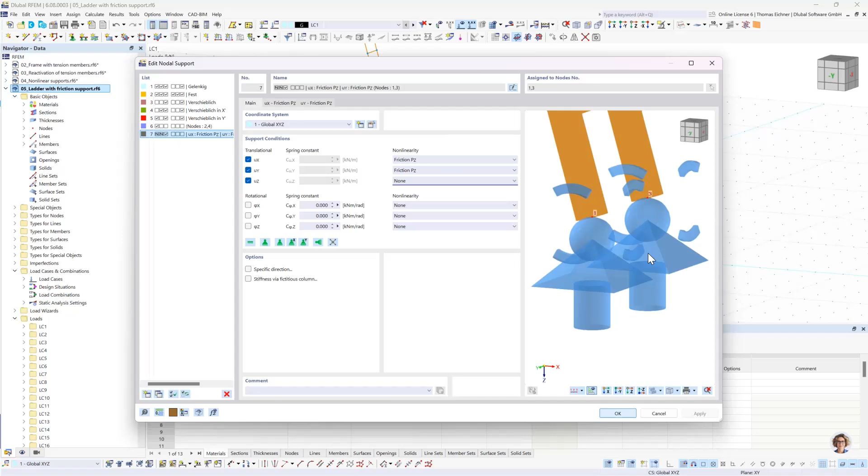Okay, so for the other two directions of the supports, we defined a friction. So with the friction, let's look at it in the x direction. We have this friction coefficient of 0.2. That means the support can hold 20% in horizontal direction of the support force in vertical direction. So if we have 1 kilonewton in vertical direction, then it will be able to hold 0.2 kilonewton in horizontal direction. And if the horizontal force gets higher, then it's just like yielding.

Okay, with that said, let's go for our loading. We can see it here. Now we have a person of 100 kilograms, and this person is gonna walk. It's just gonna walk upwards on this ladder. Let's see what happens, we're just gonna calculate all. Maybe you could also think in the meantime, what happens with the horizontal force here needed if the person goes up.

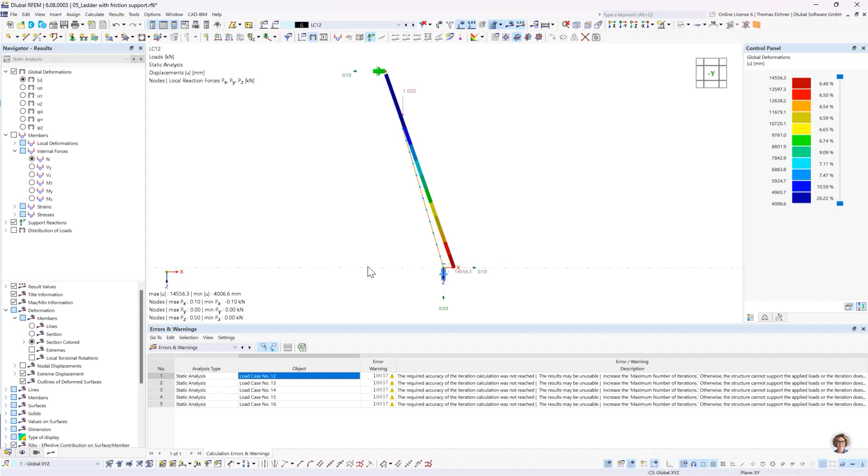So the problem here is obviously that with the person on top, the ladder would just slip away. And that's not good, right? So there are different measures to counteract this, to make it possible for the person to climb higher.

One would be someone just holds it, and we have two hands as horizontal supports, but that's not the case we're interested in. What we're interested in right now is to have another person just standing on the lowest spross here. And that's what we're gonna simulate right now.

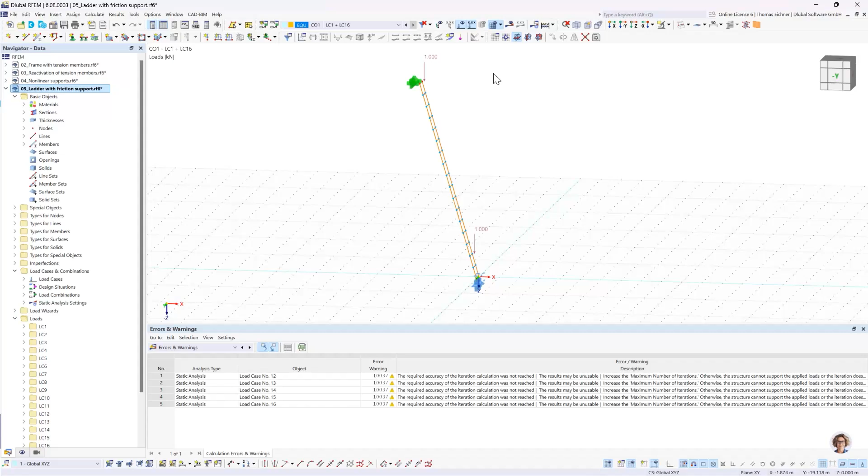We're gonna go for a load combination now. With this load combination, we will go for one man or one woman on the highest spross and one on the lowest spross. Okay, we applied it. We also see what we're gonna simulate right now, and we can directly go into our results.

So, and now it seems possible. And it's quite easy to explain. Just from these support forces, instead of having this 0.5 kilonewton per support, we now have 1 kilonewton per support. And that also doubles our capacity for horizontal loads within the supports. That's why we just proved that it helps that someone stands on the lowest spross of the ladder.

Okay, let's finish with our last model for nonlinearities. In this case, we will investigate a tension specimen. Look at it from 3D. It's just modeled as one surface. For this surface, we have a fixed support on one side, and on the other side, we will just pull it.

And we pull it with a specific force. In this case, this would be 503.572 kilonewton per meter on this line. So what is this force right now? What are we trying to investigate? Let's look into the surface for a second. It has S235 grade steel, and it's 3 millimeters thick.

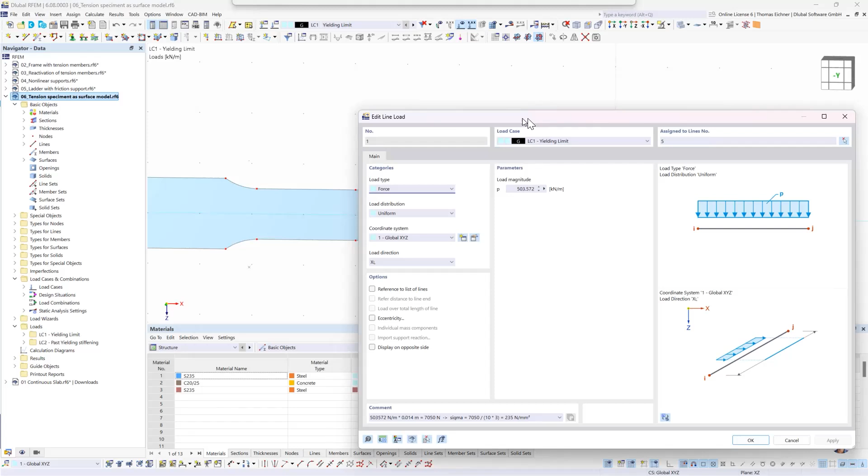So we also have here a smaller height than on the right side. So we want to have the failure within this region. And now we did apply a load on the outer line, which is shown right here. The height of this line is 14 millimeters. So this here. If we multiply this force times the length of the line, we will get this 7050 Newton.

This height here is 10 millimeters. So if we take this force and divide it by the cross-sectional area in this region, we will get to, what a surprise, our yielding limit. Well, this was completely planned. I just did the calculation the other way around to get to this force. And this way we will simulate what happens if we go into yielding with this tension specimen.

Right now, maybe we will look again into this surface. We have a material which is S235 and it's linear elastic. Okay, so we have a linear behavior of this material. Now within this first load case, 503.572, it's gonna be simulated to be at the yielding limit.

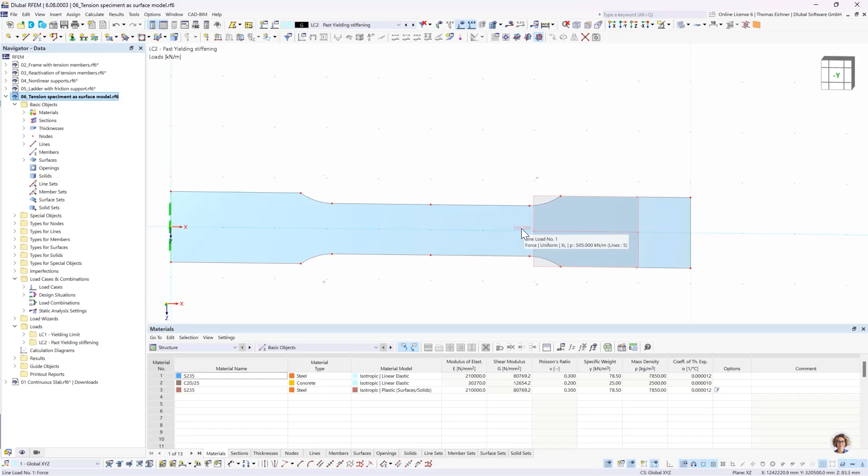And for further investigation, we also added a load case, which is here with a 505 load, so just a tiny bit higher, a tiny bit over the yielding stiffness. And that's the two load cases we're gonna investigate now. Let's calculate both.

And exactly, now we can see the results right here. Then we can see a deformation of 0.1 millimeter right here. We can also display it as an animation here. And yeah, quite simple, 0.1 millimeter.

That looks fine. Let's look at our post-yielding situation. Well, it looks quite the same. It looks quite identical. Also, again, deformation of just 0.1 millimeter. So, for the stresses, I mean, it's a 235 grade steel. That means we can look up our stresses, and there we will go with our equivalent stresses, according to Mises.

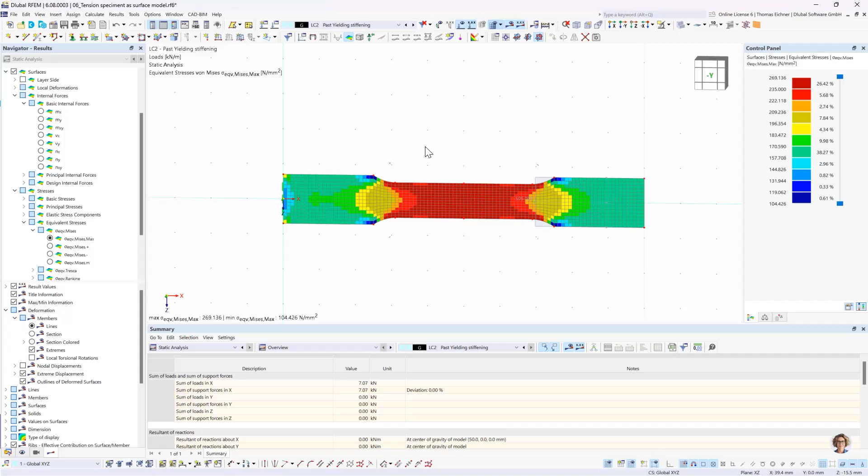One more hint with this results here. What you see is the finite elements, and the elements have all an equal value within the element. This is important when you're interpreting stresses as results, because you don't want the stresses to change within one element.

If we go for results, and for calculate and this results smoothing, there we can adjust how we see it. Right now we got this constant on the mesh elements. If we go for the continuous within surfaces, then it's following the line to our surfaces. It looks quite smooth, but it's not perfect for result interpretation. So this is cool for visualization, but not the best for interpretation. So we will go back and get it into the constant on mesh elements.

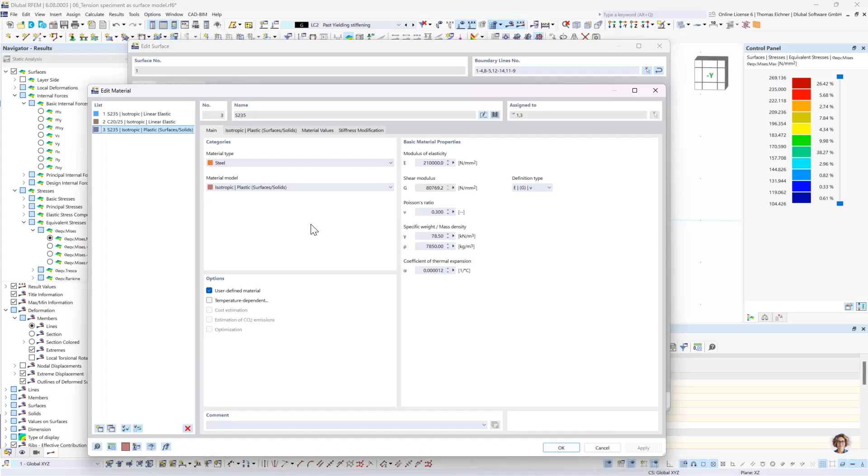Perfect. Now we're gonna do what we wanted to do. We're gonna look at our plastic material. Let's also take a glance inside it. Here it is, we have a plastic material. The rest is quite the same as for the linear material, but we have an additional tab here on top.

And if we click on it, we will be able to define the limits of this plasticity. Right now, for it, we will use the von Mises stresses. That's why I also showed you the equivalent von Mises stresses right here. And for them, we will define the yield strength, which is 235. This is automatically, everything here is just automatically done by the program.

We have our elasticity modulus for the pre-yielding region, and we have a small stiffening afterwards. But you see, it's like 1/100,000 still of the initial elasticity.

With that, we can go into our results. Let's go for a calculation of everything. Also, you will see some convergence diagram on the right, which will have some more iterations, but it's fast anyway for this case.

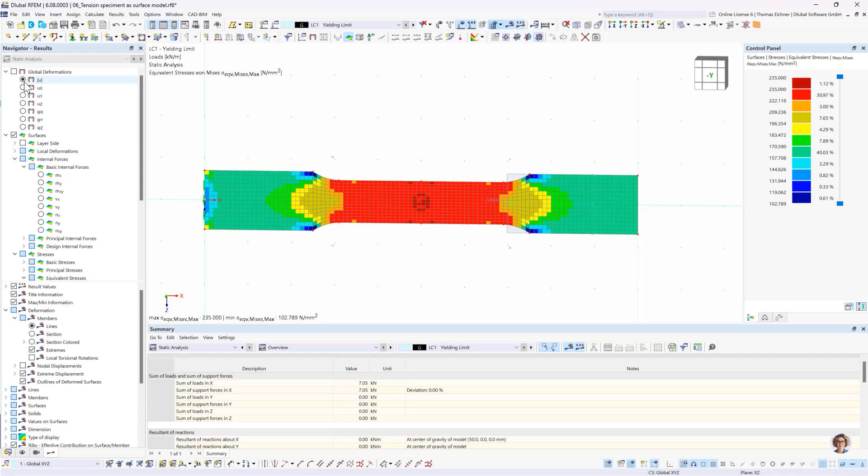So, but let's look at our deformations. Our deformations for the yielding limit and plastic material, they are 0.1 millimeter. So the same as with elastic material.

Now we will go for our past yielding loading. We click it and, oof, that's something different. Now we have 8.2 millimeters. So like 82 times the deformation we would have with a linear material.

And also what we see within the deformation, let's look at it in our animation. It will also shorten, you see it right here. So in the cross-section plane, it will shorten. And that's with the Poisson's ratio, which we had in the first part of the webinar.

Okay, but that's quite different, right? So as soon as we have a trespassing of those yielding limit, we shouldn't go for the elastic material anymore, or we should increase its limit at least, or change a different material, let's say it that way.

Also, now we're interested, okay, which elements are yielding in this case? That's something we can also investigate with RFEM. We could go for our criteria here, and there we can go for our plastic criteria. So right now we see everything as estimated within this region in the middle is already in the plastic region, so in the second part of this bilinear material definition.

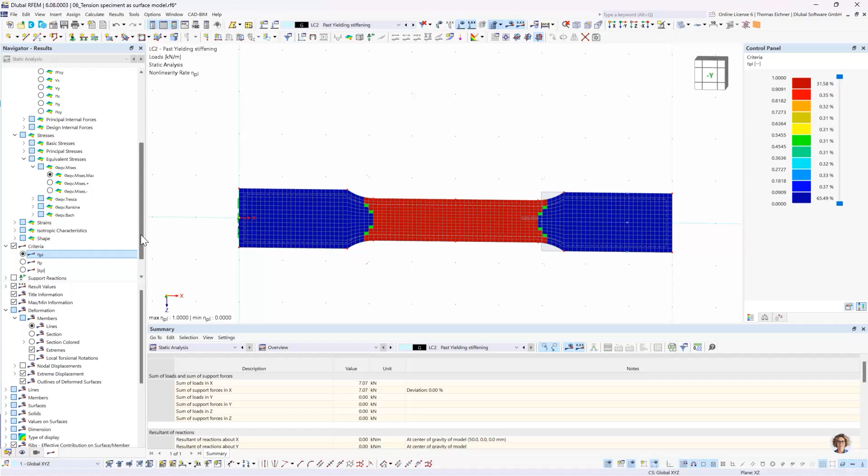Also, for sure, we can watch our equivalent von Mises stresses. And there we will also see this 24% here on top. They lie between our yielding limit and a higher value. The higher value is not that much higher, right? This is due to...

our post-yielding stiffness, which is just 2.1. That means we won't have just like one line here which takes every force now, which could be possible with an elastic material model, but with this very small elasticity modulus, everything here needs to take its part for taking the load.

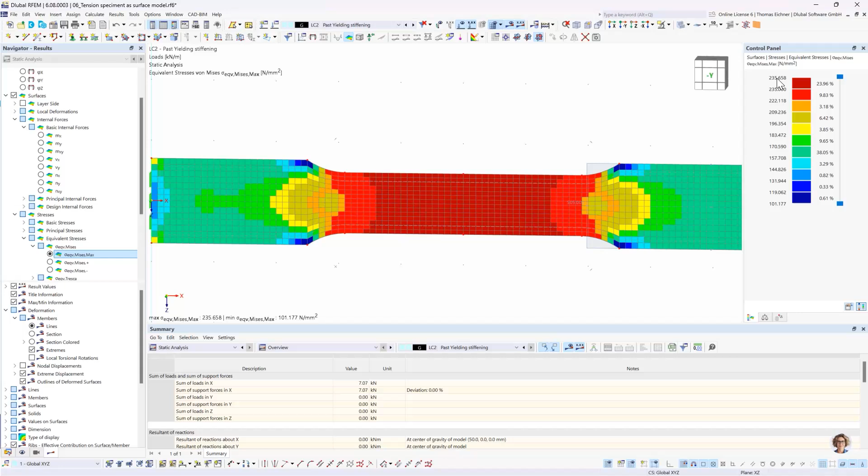Okay, all right, so this is like everything for non-linearities. And now we can get to our last part of the day, and this will be our singularities. So let's go into PowerPoint again.

Singularities, well, what are these and where do they occur? First, they occur at points of discontinuity in the calculation model. The problem is they deliver no meaningful results. It's a model problem, not a physical problem that really occurs on site. We will get infinite stresses and infinite internal forces. A mesh refinement will not improve the result. Contrary, it most likely will just increase the singularity.

For RFEM, or in general, there are different locations where singularities can occur. This is point and line loads. Also point and line supports, which are from the physical understanding kind of the same. And at openings and re-entrant corners, as well as when the stiffness makes jumps. So for example, when the stiffness changes due to a material change or let's say a thickness jump, that's also a situation for singularities.

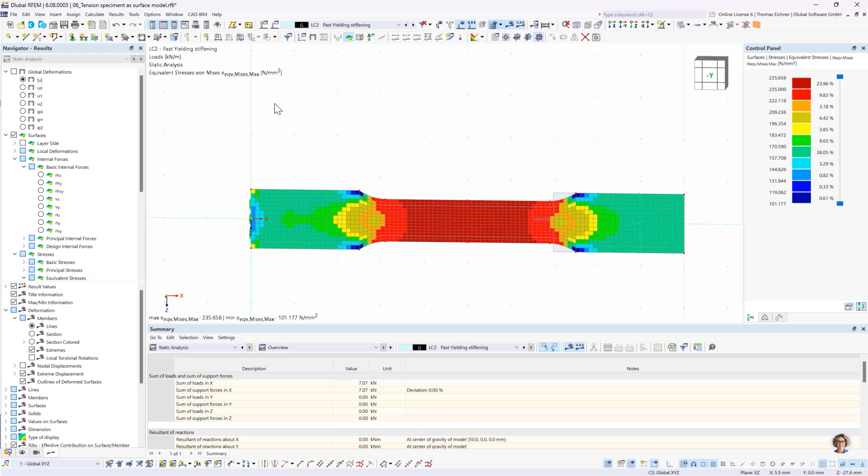And for it, we're just gonna create a new model. We're gonna go for 2D XY plane, and we're also again not gonna use the combination wizard and the load wizard. The name would be something like, let's say, 7th example, call it singularity of a single load. Okay, and that's it.

If that, we have our model right here. We can go into our Z direction view and just create our stuff as we did previously. Let's create our surface again.

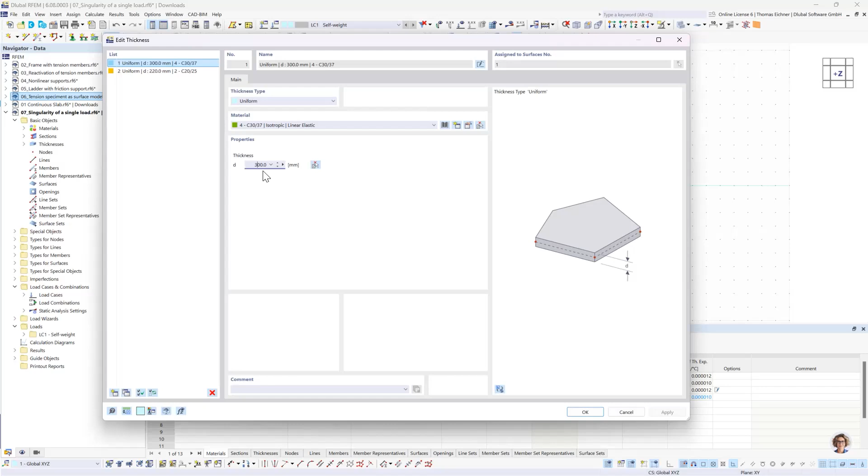Okay, I don't have our material here, so I will just search our C30 again. If you model with me, you should have now this material already saved from our first model. I just opened our tension specimen in between, that's where I got those materials imported from. Okay, we're gonna go with this concrete and make this 300 millimeters in this case. Okay, we're gonna press OK, and then we're gonna make this slab just like 8 times 6 meters.

Now we wanna investigate a point load. That means we're gonna just place it in the middle, right, we're gonna place a node in the middle of our slab. And on that node, we will apply a 100 kilonewton nodal force. So we have our stiffness matrix defined, we have our load vector defined. Now I think I deleted load, that's not good.

There it is again. Now we need some boundary conditions. Let's put in just some predefined line supports to every line in the system. And well, that's it already. We're gonna do the same as in the first model today. We're gonna copy it about 3 times.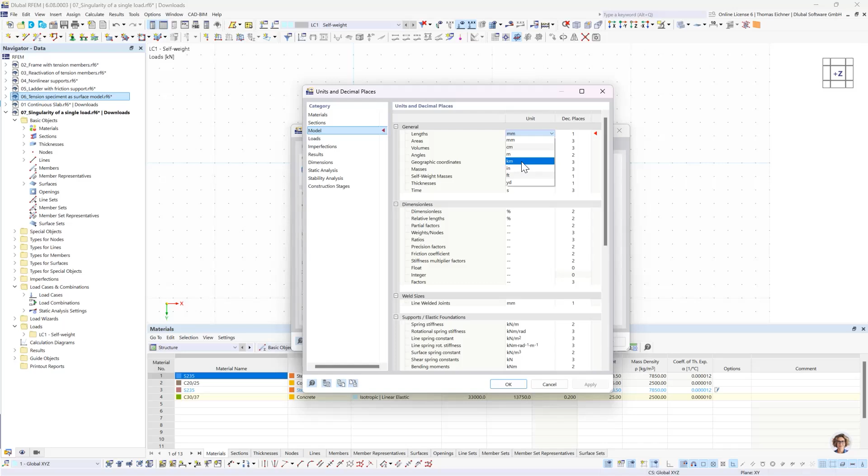And with a displacement, oh, here comes the millimeter again, let's change it to meters again. And since they are this time 8 meters, we're gonna displace them by 10 meters, 3 times, that's good. There we have it. Well, this grid, we don't need to see it right now, we don't have any use for it, so we're gonna just deactivate it here on the bottom.

So the next step would be the surface refinements, and that's something we also learned some speed here already. Let's go for 2 meters for surface 1. The next one will be 1 meter for surface 2. The next one with 0.5 meters for surface 3. And the next one, okay, let's not go too small, let's go for 0.25 meters for surface 4.

Okay, we see the rectangulars again, and we also want our result section. Means we're gonna go for special objects and then this result section, just define the two end nodes for the result section, here and here. Okay, there it is, and then we're good to go. We just need to deactivate our self weight again, and then I'm just gonna start the calculation right here.

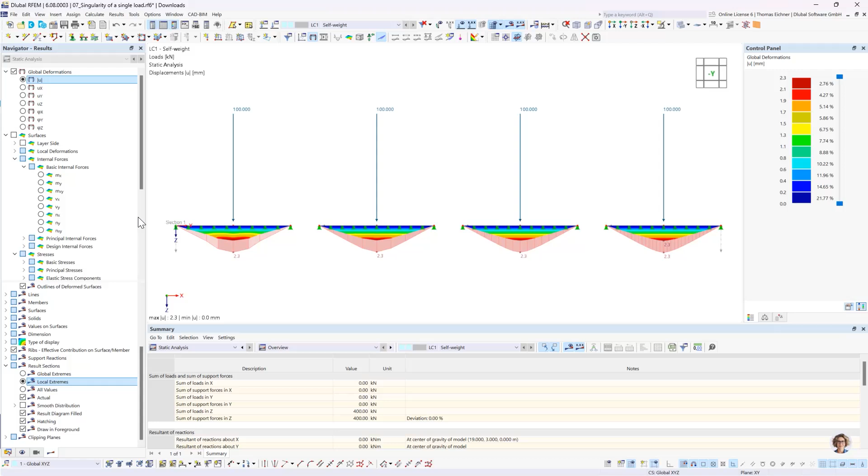But let's see what happens if we look at our bending moment. Let's activate the MX, and now the singularity takes place. On the left side we have 37.17 kilonewton meter per meter, compared to the right side where we have 52. So I'd estimate 20-30% more. That's quite a lot.

Well, 50% off this one, but yeah. For the design, what value would we use to calculate the needed reinforcement in this case? Would we go for this 52? Would we go for this 37? What's right here? That's a well, often occurring problem in practice, because we need a design, right? So we need an approach to design these differences.

And there we have some approaches for this. For this approach now, we will go into our result section itself. Let's go right here, and result diagrams, there it is.

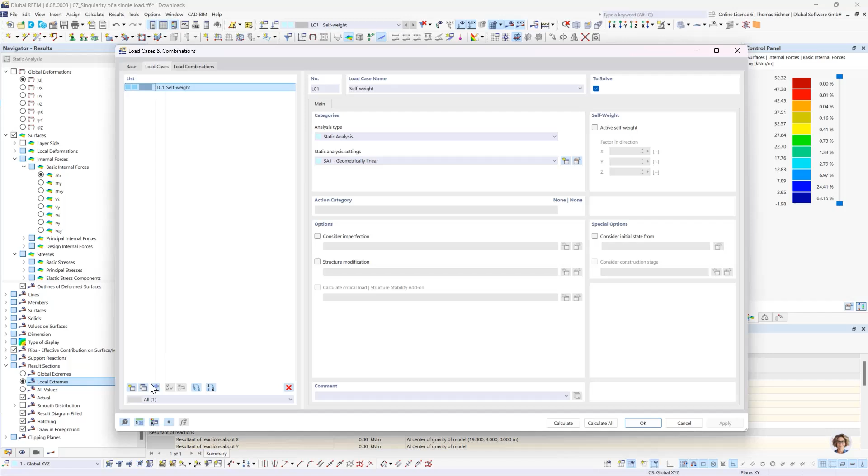Let me just copy this load case. In the next step, we will assume there's a column on top with dimension 0.5 meters times 0.5 meters. That means we want to have a loading which is also like this, an area load and not a concentrated load anymore. So let's go for this new free rectangular load.

This function right here is exactly what we want. We want to have column dimensions of 0.5 meter, and we want to have a center point right here. Then we also need to assign it to a surface right here, so surface 1 with the center this and the column dimensions of this. Now we can apply - oh, I forgot the load value. The load value would be, let's go for a formula here.

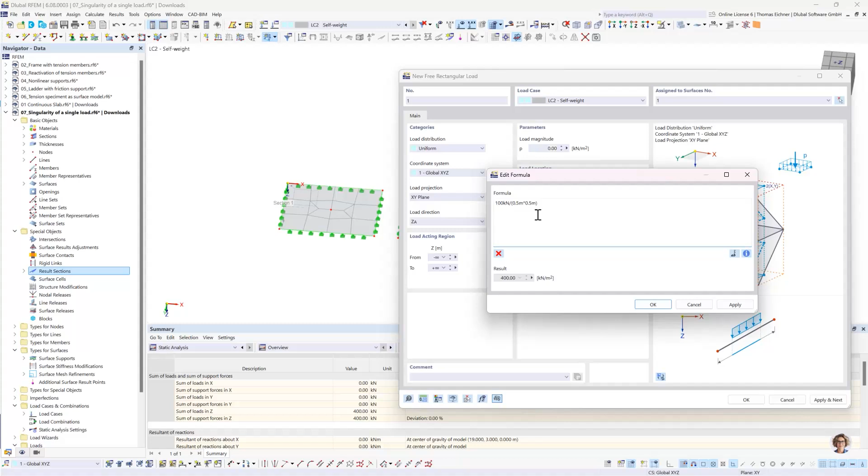This is now, let's see, 100 kilonewton, that's what we had as a point force, divided by 0.5 meters times 0.5 meters for the area of this new column. It's done, and we have a result of 400 kilonewton per square meter. We can apply it, and there it is.

Now we're going to repeat it also for the other surfaces, and therefore we only select the node and the surface and apply next. There it is. And this same procedure we're going to repeat 2 more times.

This is okay, surface 4. Well, we need this node here in the middle. And there it is. So let's calculate already and see what our results do.

Let's go in the y direction. And what a surprise, it helps us. It helps extremely, and it also correlates with our smoothing range, right? This one is a bit smaller than the rest now. We have 30. I think with the smoothing rates we had around about 31, maybe here 28. And yes, that's quite cool.

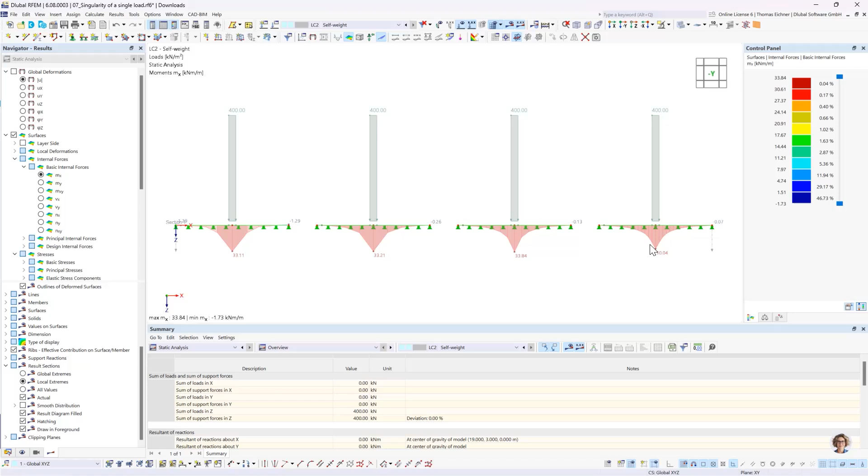One other thing, of course, you could also combine those two variants. So we could use this result now and also smooth it over a certain range. So that's one possibility, or two possibilities, to counteract singularities.

Okay, and now we're going to treat our last investigation for today. Therefore, we will need a new model. And we're going to pick this time 8, and there we're going to go for nodal support singularity.

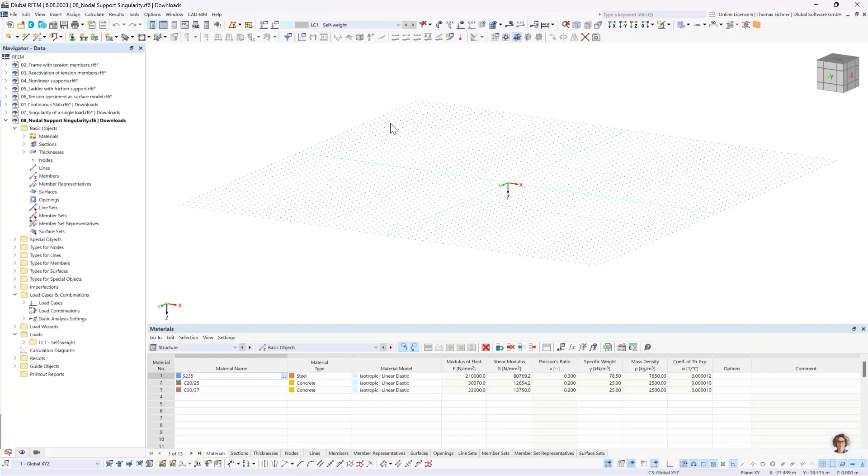And there it is. Again, we're going to go for 4 slabs here. Let's just start right away. This time it's quite easy. The only thing I want to change is here, I want to go for 300 millimeters again, and stay with these C30/37. Press OK.

And then we can create our system with, let's say, 8 times 4 meters. And we will want a nodal support right on the left-hand side, so at 2 meters and 2 meters. We will want to have a line support on one side of the surface right here, and we want to have a nodal support just in that direction right here in the middle. Okay, we can also adjust the size here a bit.

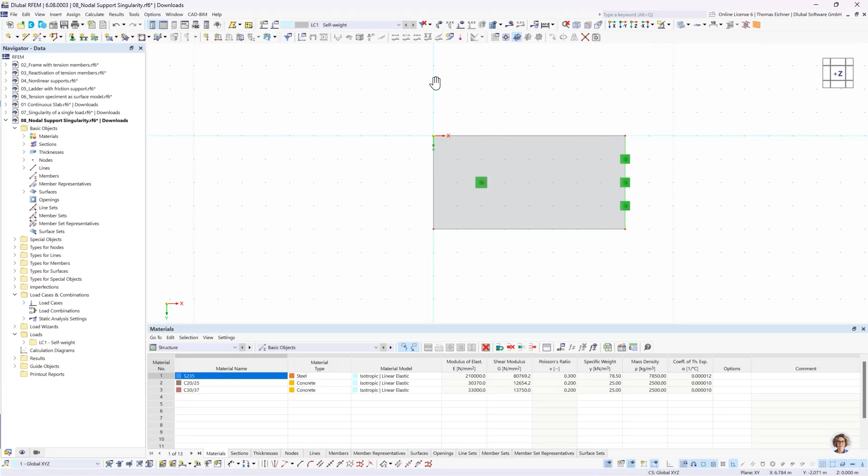Okay, next step, just as before, we're going to load it with 10 kilonewton per square meter. And we're going to copy all of it in the same way, 3 times in 10 meters.

Okay, there it is. Then we're going to add our surface refinements, mesh refinements, same way as before, 2 meters for the first one, 1 meter for the second one.

Oh, now I was kind of too fast because I did it for 2 surfaces here. Okay, 1 meter for the second surface. Copy. 0.5 for the third surface. And for the fourth surface, we will go with 0.25.

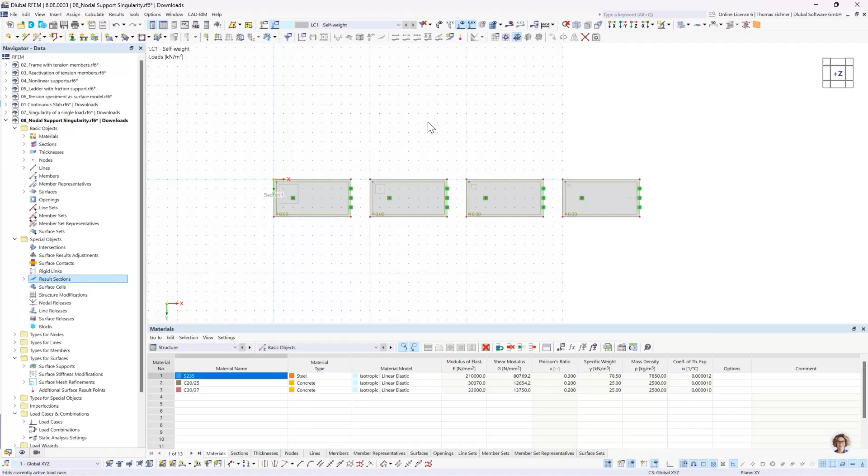Okay, that's what we have here. The last thing missing is our special object, which is our result section, defined by 2 points. Okay, so it's done already. Let's go and deactivate the self-weight again and calculate it already.

Okay, let's go in the Y direction again. Maybe this time we can go with the view cube. There it is. Let's also have all our values here. There we see, now we see the problem with this mesh here. Well, an exemplary problem. We see on the finer mesh, we see our maximum of 1.7 millimeters, kind of right there.

With information, we don't need them. We have this 1.7 millimeters. This 1.7 millimeters would be in between this 1.3 and 1.4, but we don't have a result there. Means we just forgot some internal forces to investigate. That's a big problem. So we need to have at least 1 or 2 points in the vicinity of these maximums. Okay, that's one problem we can directly see from these deformations.

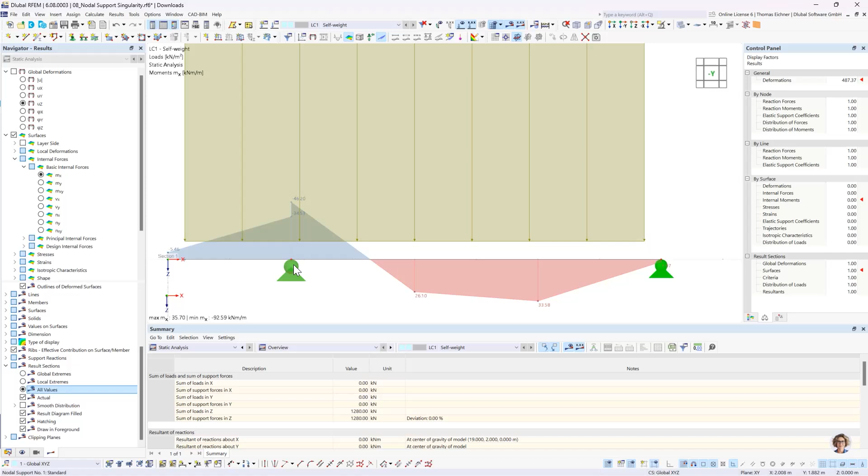But let's see at the other point, and that means let's look at our result sections, which should be the same results as our surfaces. And there we want to have our Mx again. And what's happening here? We have 46. We even have a jump here. That's not really right, that's due to there only being one element here. So here the results are obviously wrong.

And in the other ones we see it quite better. But the problem is above the nodal support, let's deactivate the loads, we have again a value that gets higher and higher the finer the mesh is. So for those singularities, we would have the same options as before. We could use the integrated values, like the result smoothing, or we can also go and edit our support. This is quite similar to the case where we just transferred the nodal load to our surface load.

But right here we can go into our nodal support, and we could either just add a spring constant. This would make the support flexible and it would be able to deform vertically.

The problem is it wouldn't help with the singularity, since this is not really a statically overdetermined system. I mean, it's a plate and it has one support on the right side and one support on the left side, so we could call it statically determined. And with that said, if we add some deformation capacity to the support, it would be able to deform like in that direction, but it would have to take the force anyway, because the force can't go anywhere else. That's only possible with statically overdetermined systems. That's the reason why it wouldn't help in this case.

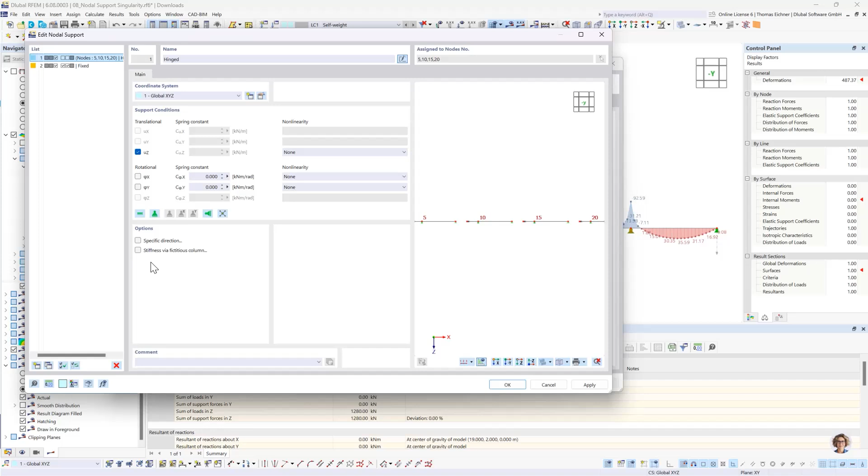But what would help, what can help, is that we add an imaginary column, a fictitious column. And this column can be defined in the step.

We will go for a column of 3 meters, and we'll see the values change at each input. We will go for material C30, a hinged column base. What the program does now is calculate equivalent springs right below the support, which are calculated from the geometric boundaries of the column below. We can also define if it should be a surface-like support, or just this one elastic nodal support, which won't get us too far ahead right now. So we will go with this elastic surface foundation.

Okay, let's apply it. And let's go into our results one last time.

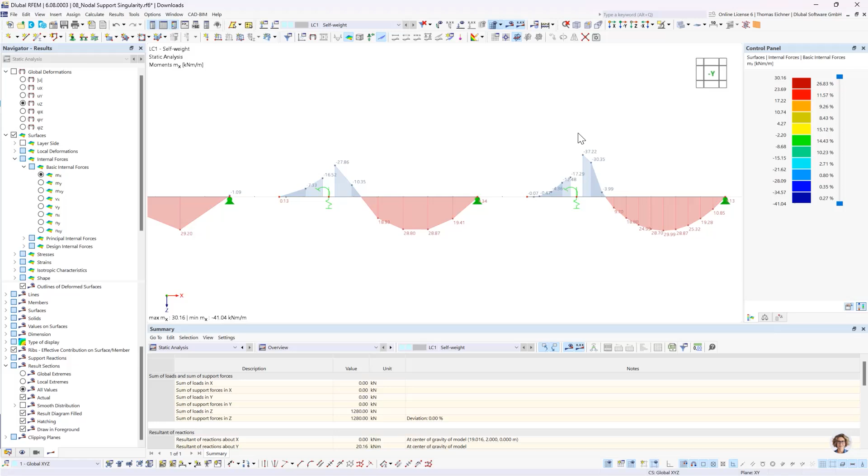So, okay, now what can we see here? It's quite better than before, because here we had around about 90. We don't have results now for this elastic support, since it just goes into the support here already. But look at the difference here, a difference of 4. I would compare those two, those are fine. This one, maybe the system is still too coarse, I would say. And this, we can forget anyway.

So this helps a bit, right? Maybe another results mesh refinement would also help. I think the results mesh refinement, in my opinion, had the best impact on our singularities for the day.

Okay, maybe one last hint about singularities. The problem with singularities is due to the finite element size. Let's think about this.

For example, this nodal support here - we see now this white rectangle, and we have a force here. If it's a nodal force or a nodal support, that doesn't matter - in the end, for the system, it's just a point force. So the problem is the point force must develop over the space. Right now, if we try to apply it to this rectangle, we would have a pretty big area it could go to. But the smaller these finite elements get, the smaller the force can distribute around.

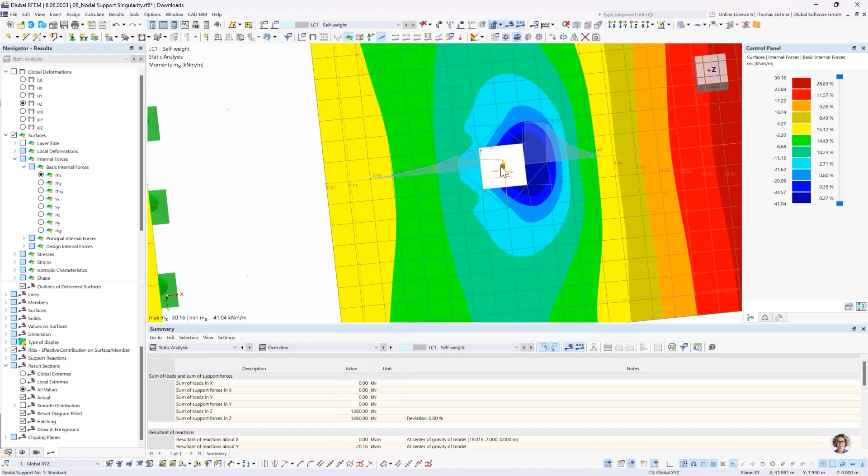And if it's infinitesimally small, then our reactions would tend to infinity. That's mathematically correct, but physically it's just not going to happen, because we never have one pointy needle in those systems. And if we had, then the needle would just punch through this slab.

And that's it for today. Let's maybe just revise what we did. We looked into the finite element analysis and its principles, how the procedure is within programs as well as in general for finite element analysis. We looked at it in RFEM 6, and we looked at the impact of the finite element lengths on the results. Then we investigated the plate theories, the difference between the Kirchhoff and the Reissner-Mindlin theory. We said that the Reissner-Mindlin theory is the standard, it's the better approach, and it's used in the programs by default.

We also talked about nonlinear calculation, whether geometric nonlinearity or material nonlinearity. We investigated several examples for it. And in the last part, we looked at some singularities and how we can counteract those.